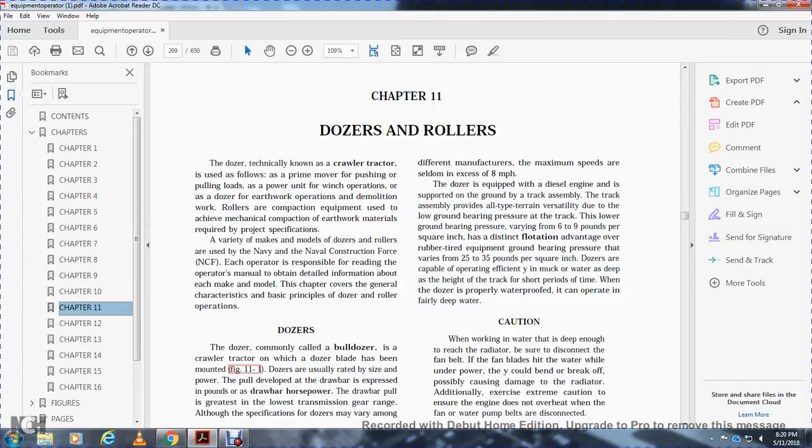We're on Chapter 11: Dozers and Rollers.

Dozers are known as a crawler tractor. It is used as a primary mover, pushing and pulling loads, as a power unit for winch operations, as a dozer for earthwork operations, and for demolition work. Rollers are compaction equipment used to achieve mechanical compaction of earth materials required for project specifications.

A variety of makes of dozers and rollers are used by the Navy and Naval Construction Force. Each operator is responsible for reading the operator's manual to obtain detailed information about each make and model. This chapter covers general characteristics and basic principles of dozer and roller operation.

Dozers are commonly known as bulldozers. It is a crawler tractor on which the dozer blade has been mounted. Dozers are usually rated by size and power.

The pull developed at the drawbar is expressed in pounds, or as drawbar horsepower. The drawbar pull is greatest in the lowest transmission gear range, although specifications for drives on dozers may vary among different manufacturers. Maximum speed is seldom in excess of 8 miles an hour.

Dozers are equipped with a diesel engine supported with a ground track assembly. The track assembly provides all-terrain versatility due to the low ground bearing pressure of the track. Low ground pressure, varying from 6 to 9 pounds per square inch, has a distinct flotation advantage over rubber-tired equipment, where ground bearing pressure varies from 25 to 35 pounds per square inch.

Dozers are capable of operating efficiently in muck or water as deep as the height of the track for short periods of time. When the dozer is properly waterproofed, it can operate in fairly deep water.

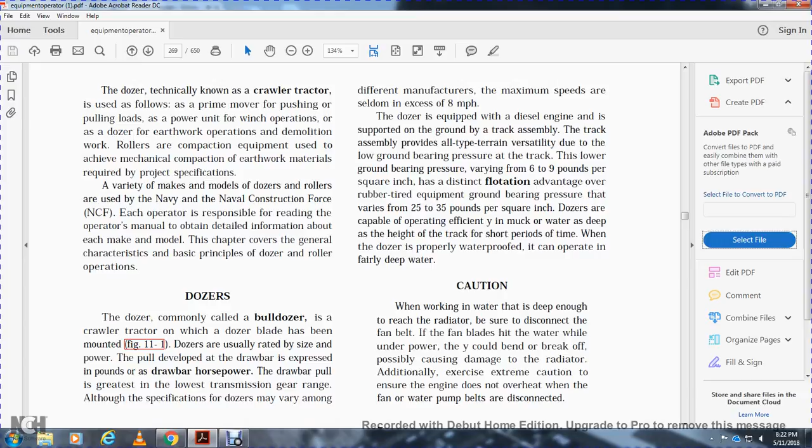Caution: when working in water deep enough to reach the radiator, be sure to disconnect the fan belt. The fan blades hitting the water while under power could bend or break off, possibly causing damage to the radiator. Exercise extreme caution to ensure the engine does not overheat when the fan or water pump belts are disconnected.

Figure 11.1 is the dozer. Figure 11.2 is a side view showing the crawler track chassis, including the drive sprocket, the track assembly, the carrier rollers, the front idler, and the track frame.

Dozers can move from job site to job site under their own power at slow speeds. However, this is poor practice and tends to shorten the operational life of the dozer. For this reason, the dozer should be transported by tractor trailer from job site to job site.

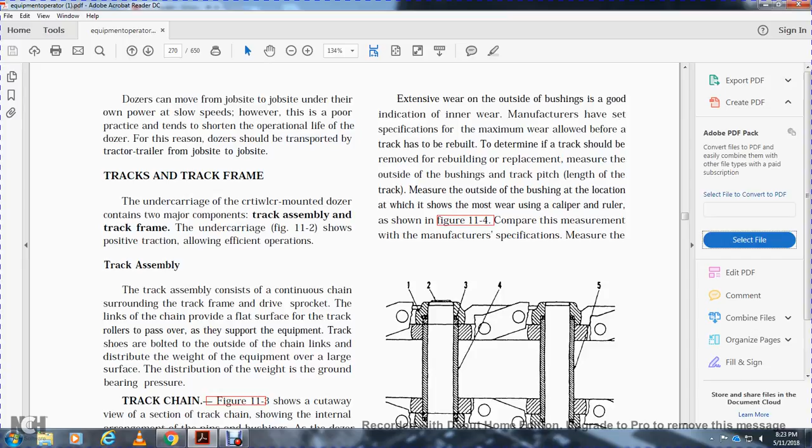Track and track frame: the undercarriage of the crawler-mounted dozer contains two major components, the track assembly and the track frame. The undercarriage provides positive traction along with efficient operation.

Track assembly: the track assembly consists of a continuous chain surrounding the track frame and drive sprocket. The links of the chain, provided with a flat surface, allow the track rollers to pass over as they support the equipment. Track shoes are bolted to the outside of the chain links to distribute the weight of the equipment over a large surface, which is the ground bearing pressure.

The track chain, Figure 11.3, shows a cutaway section of the track chain showing the internal arrangement of the pins and bushings. As the dozer operates, the drive sprocket's teeth contact the track pin bushings, pulling the dozer along. The pins and bushings wear much faster than other parts of the track because of the constant pivoting as the track rotates on the track frame.

This pivoting results in internal wear of both the pins and bushings. As the pins and bushings wear, the track links lengthen, and the track should be adjusted to remove any slack. Extensive wear on the outside of the bushing is a good indication of internal wear.

Manufacturers have set specifications for the maximum wear allowed before the track has to be rebuilt. To determine if the track should be removed for rebuilding or replacement, measure the outside of the bushing and the track pitch length. Measure the outside of the bushing at the location showing the most wear, using a caliper and ruler as shown in Figure 11.4, then compare this measurement with the manufacturer's specification.

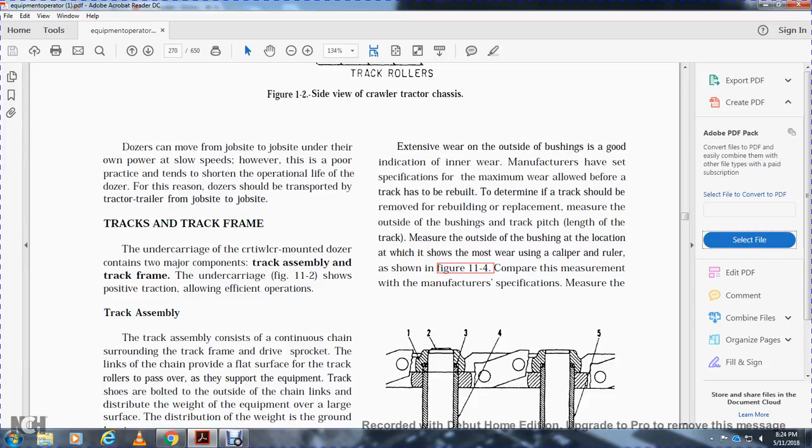Figure 11.3 shows: 1. the spacer, 2. the master pin, 3. the cone disc seal washer, 4. the master bushing, 5. the track bushing, 6. the link, 7. the track pin, and 8. the cone disc seal washer.

Figure 11.4 shows bushing wear measurements.

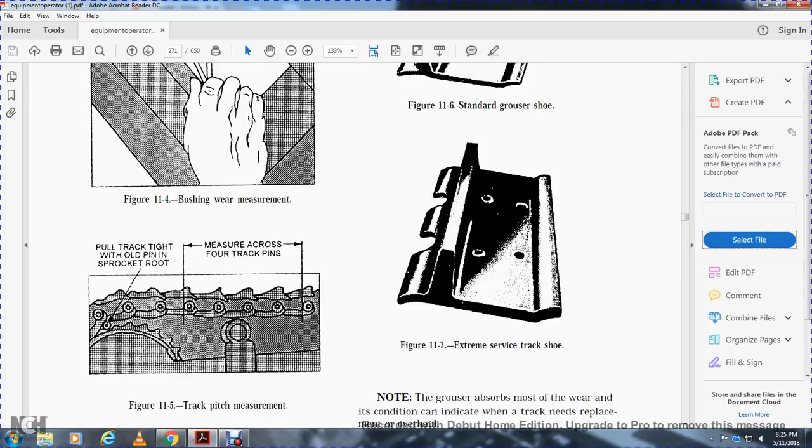Figure 11.5 shows the pull track tight with old pin in sprocket root, and measure across 4 track pins. Track pitch and ruler tape measures are used for tightening the track.

Remove any slack in Figure 11.5.

Track shoes: the most common track shoes are Grouser shoes, shown in Figure 11.6. The shoe is standard on crawler mounted dozers. The extreme service track shoe, shown in Figure 11.7, is equipped on crawler mounted dozers that operate primarily in rocky locations such as rock quarries and coral beaches. Notice the Grouser and raised portion of the shoe is heavier than the standard Grouser shoe. So there's the standard Grouser shoe, and then the Extreme Service Track shoe.

Note the Grouser absorbs most of the wear, and its condition can indicate whether the track needs to be replaced or overhauled. The track frame serves as a framework supporting the track assembly, rollers, front idler, recoil spring, and adjusting mechanism.

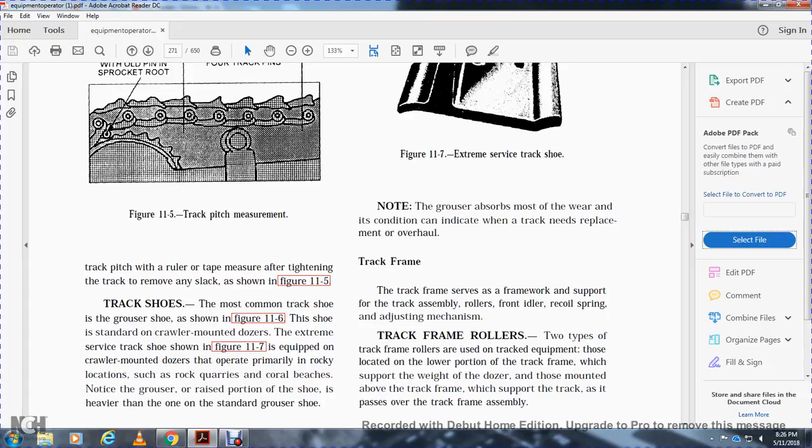Two types of track frame rollers are used with track equipment. Those located on the lower portion of the track frame which supports the weight of the Dozer, mounted above the track frame to support the track as it passes over the track frame assembly.

The single flange of the roller extends up between the links of the track chain, keeping the chain in alignment between the drive sprocket and front idler.

Track rollers support the weight of the Dozer and ensure track chain alignment with the frame as it passes under the rollers. Figure 11.9 shows track rollers, both single and double flange, installed along with the drive sprocket and front idler.

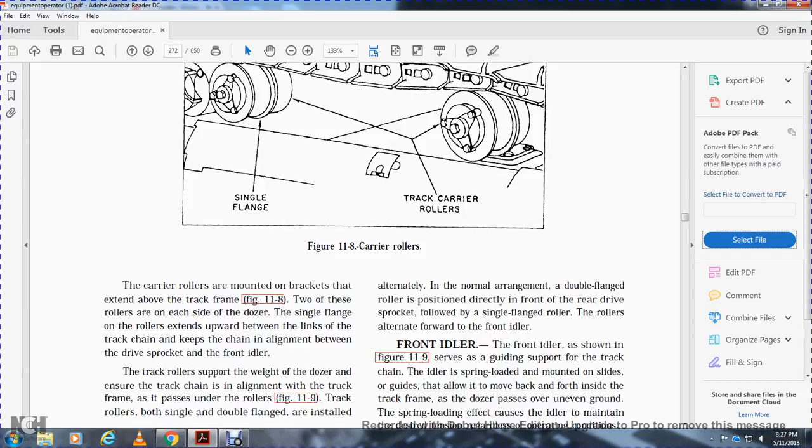Alternately, in a normal arrangement, the double flange roller is positioned directly in front of the rear drive sprocket, followed by the single flange roller, with rollers alternating forward to the front idler.

The front idler is shown in Figure 11.9. It serves as a guiding support for the track chain. The idler is spring loaded and mounted on slide guides, allowing it to move back and forth inside the track frame as the Dozer passes over uneven ground. Spring loading effect causes the idler to maintain desired tension regardless of operating conditions.

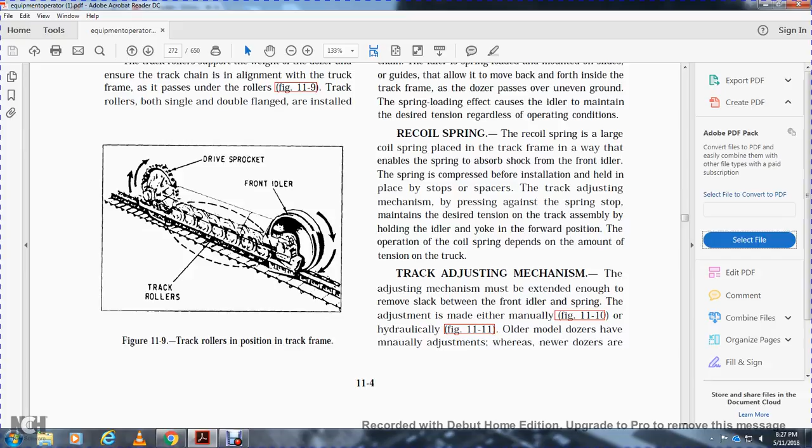Track adjustment mechanism: the adjusting mechanism must be extended enough to remove slack between the front idler and spring. The adjustment is made either manually, as in Figure 11.10, or hydraulically, as in Figure 11.11. Older model Dozers have manual adjustments, whereas newer Dozers are adjusted hydraulically with a grease gun.

The grease gun is pumped and the yoke cylinder extends, providing enough tension to compress the recoil spring and remove the slack from the track. Tension is relieved by loosening the vent screw located with the adjusting fitting. Figure 11.10 shows manual track adjustment, while Figure 11.11 shows hydraulic track adjustment.

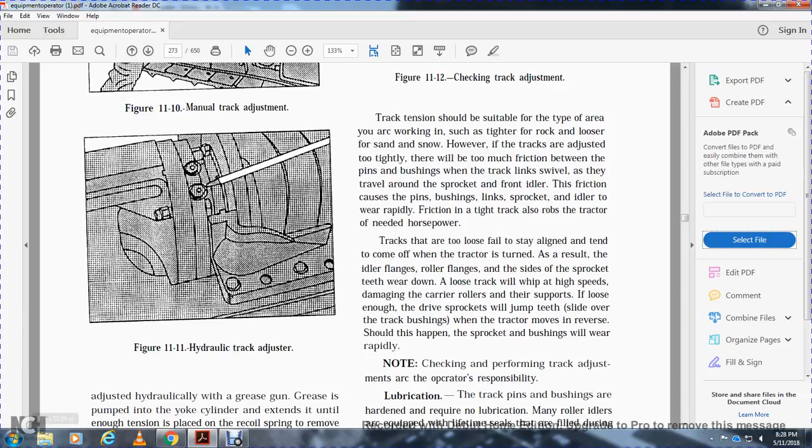Note: do not lubricate the fitting while performing daily operator's maintenance. The track adjuster fitting should only be greased when the tracks require adjustment.

Track adjustment: determine the proper track tension by positioning the Dozer on a hard surface and placing a straight edge over the front carrier roller and idler, with slack removed from the rest of the track. Tension is checked by the measured distance, shown in Figure 11.12, which should be between 1 and 1.5 inches from the straight edge.

The track tension should be suitable for the type of area you're working in, so it should be tighter on rock and looser in sand and snow.

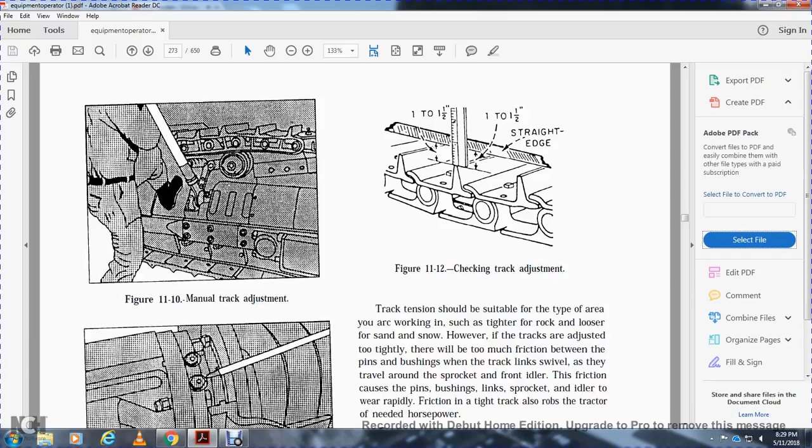However, if the tracks are adjusted too tightly, there will be too much friction between the pins and bushings as the links swivel while traveling around the sprocket and front idler, causing pins, bushings, links, and sprocket idler to wear rapidly. A tight track also robs the tractor of needed horsepower.

On the other hand, tracks that are too loose fail to stay aligned and tend to come off as the tractor is turned. As a result, the idlers and roller flanges on the side of the sprocket teeth will wear down. The loose track will whip at high speeds, damaging carrier rollers and their supports. If loose enough, the drive sprocket will jump teeth and slide over the track bushing when the tractor moves in reverse.

Should this happen, the sprocket and bushings will wear rapidly. Checking and performing track adjustment are the operator's responsibility.

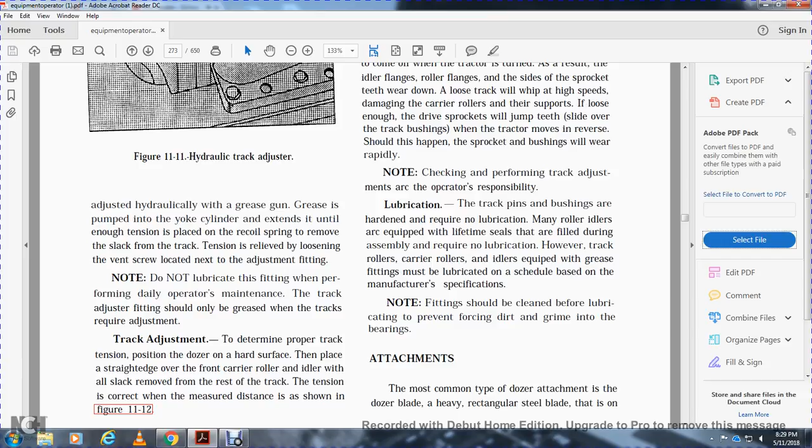Lubrication: track pins and bushings are hardened and require no new lubrication. Many rollers, when equipped with a lifetime seal that are filled during assembly, require no lubrication. However, track rollers and carrier rollers equipped with grease fittings must be lubricated on a schedule based on the manufacturer's specifications. Fittings should be cleaned before lubrication to prevent forcing dirt and grime into the bearings.

Figure 11.14 shows the dozer blade, push arms, and pitch arms. On the front of the crawler tractor, you have drifting, pushing straight ahead, with side casting pushing material to one side. Other attachments include rippers and winches.

Dozer blades' cutting edges and corner bits are bolted to the bottom of the blade. Remember, checking the cutting edge for wear is the operator's responsibility. The blade is connected with two push arms and two pitch arms, as shown in figure 11.14. Most push arms are attached to the bottom of the blade, outside of the track frame, at the trunnion.

Figure 11.15: on dozers equipped with the angle blade, the push arm uses a C-frame configuration. The C-frame is attached to trunnions wrapped around the front of the dozer, and the blade is attached to the C-frame with a steel pin.

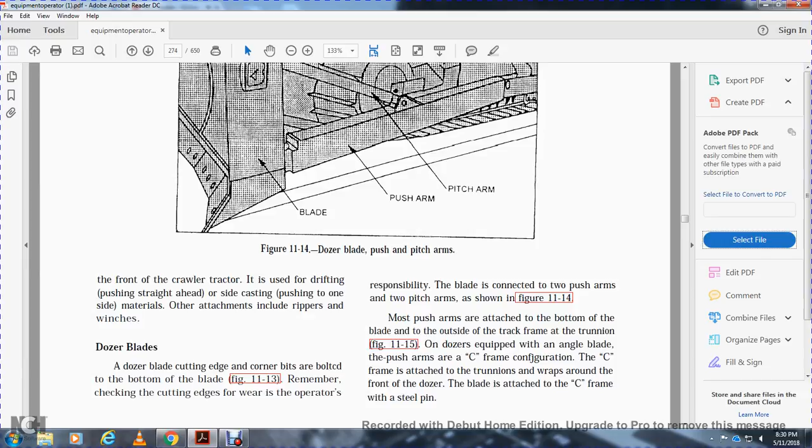Figure 11.15 shows the push arm trunnion. 1 is the cap trunnion. 2 is the bolt cap. 3 is the trunnion. 4 is the C-frame or push arm. 5 is the cap screw trunnion mounting.

Figure 11.16 shows the hydraulic pitch arm. Pitch arms run diagonally between the push arm and the top of the blade, bracing the blade against loads. The pitch arms provide a means of regulating the blade's pitch and tilt.

The pitch arms may be threaded or have hydraulic cylinders, shown in figure 11.16, to pitch the blade forward. Lengthening the arm pitches the blade forward, which helps when dozing extremely hard materials. Pitching the blade back by shortening the pitch arm helps with leveling, spreading, and cleaning loose material without the blade digging in. Tilting is done by shortening one arm and lengthening the other.

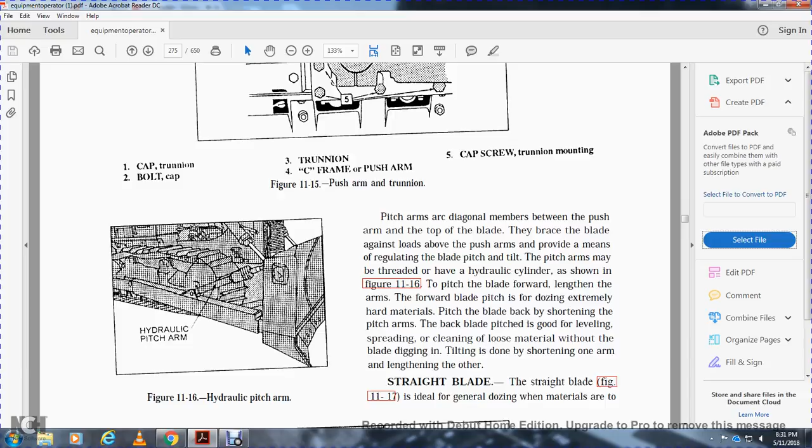The straight blade, figure 11.17, is ideal for general dozing. Figure 11.17 shows a straight blade, figure 11.18 shows an angle blade, and figure 11.19 shows a U-blade. These different blades, depending on their curvature, affect short and medium distance movement of dirt, with varying rolling action, resistance, and speed.

For dozing, the blade has sides advanced ahead of the center section and can tilt up 15 degrees to the right and left.

Your angle blade, figure 11.18, is multi-purpose and can be used for general dozing and side casting materials. The angle blade can be positioned straight ahead or angled 25 degrees to either side. The mold board has a greater curve than the straight blade, producing more rolling action.

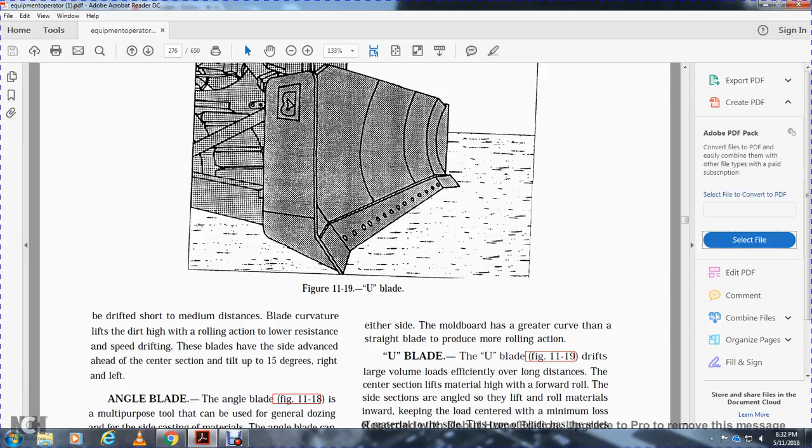Your U-blade, figure 11.19, moves large volume loads efficiently over long distances. The center section lifts material high with a forward roll, while the side sections angle inward to lift and roll materials, keeping material centered with minimum loss to the sides. This blade type has sides well advanced over the center section, is U-shaped, and may be lifted or tilted 15 degrees right or left.

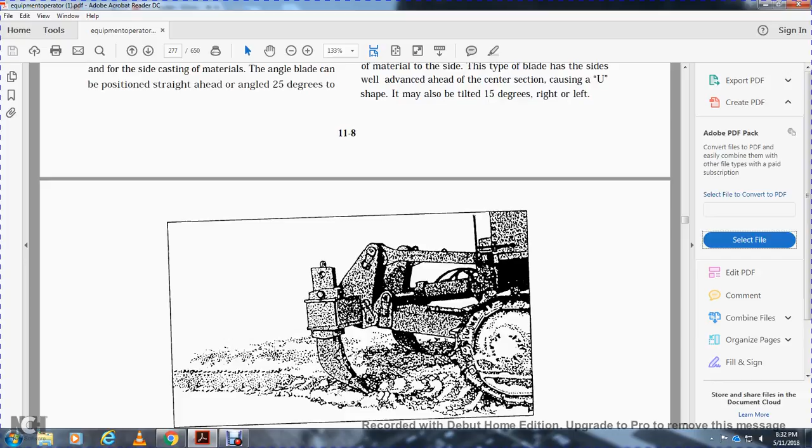Figure 11.20 is a ripper attachment, and figure 11.21 shows a winch attachment. The ripper attachment is mounted at the rear of the dozer. The ripper is a powerful tool used to break apart compacted materials, uproot boulders and stumps, and loosen shale, sandstone, asphalt, pavements, and rip up concrete slabs.

After these materials are uprooted and ripped, they can be removed more easily by supporting equipment. Note: care should be taken when turning the ripper teeth into the ground, because sudden damage to the ripper teeth can occur.

Winches are mounted on the rear of the dozer. Figure 11.21 shows a direct-geared rear power take-off arrangement, which permits development of a line pull 50 to 100% greater than straight dozer pull.

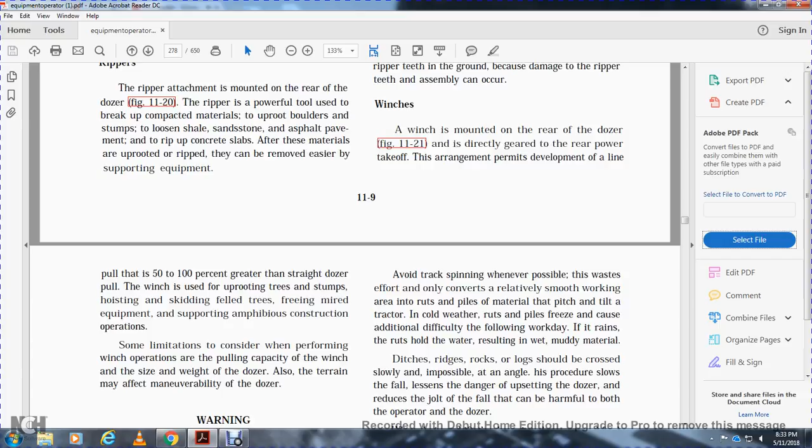The winch is used to uproot trees and stumps, hoisting, skidding felled trees, freeing mired equipment, and supporting amphibious construction operations. Some limitations to consider in winch operations include pulling capacity; the winch should match the size and weight of the dozer.

Also, terrain may affect the maneuver of the dozer.

Warning: the breakage of the wire rope is seriously hazardous to both the operator and the helpers. Wire rope stretches under strain, and if it breaks, it whips with great force. The danger to the operator is greatest when operating a dozer in the area in direct line with the wire rope while it is under strain. Everybody in the area should stand clear of the full length of the paid-out wire rope.

When winding the wire rope back onto the winch drum, ensure the rigger's hands are clear of the winch drum by at least 3 feet.

For safety, ensure the wire rope used is of the best quality, meets the manufacturer's specification, and is properly inspected before use. Always wear leather palm gloves when handling wire rope.

It's good practice to work the winch at less than maximum capacity, avoiding anchoring the dozer unless absolutely necessary. Moderate loads extend the life of the wire rope and winch parts and avoid severe catching on the drum.

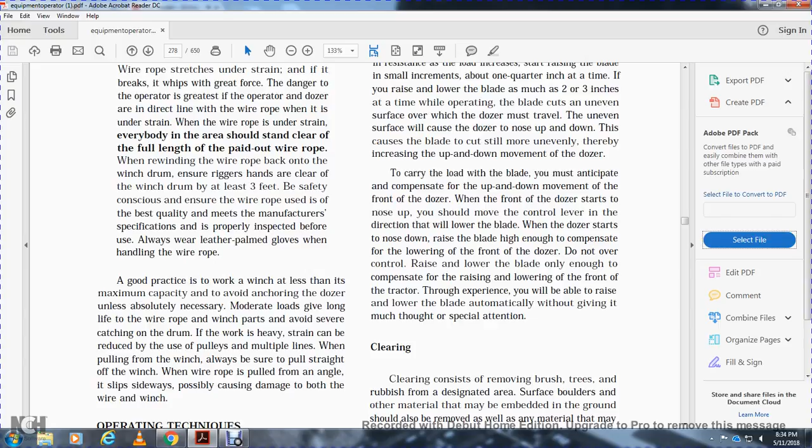Operating techniques: the dozer blade and hydraulic controls are operated by a lever to the operator's front in the cab. Before starting work, lower the blade several times to get a feel of the hydraulic control.

Start a job, if possible, from relatively level ground. If necessary, level an area large enough to provide sufficient workspace for the dozer, preventing back-and-forth pitching of the dozer and resulting in better blade control.

Avoid track spinning whenever possible; it wastes effort and only converts relatively smooth working areas into ruts and piles of material. In cold weather, ruts and piles that freeze cause additional difficulty the following workday. If it rains, ruts hold water, resulting in wet, muddy material.

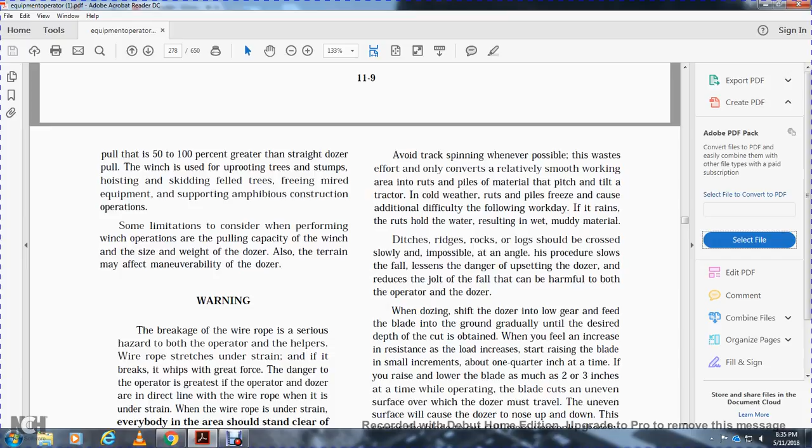Ditches, ridges, rocks, and logs should be crossed slowly and, if possible, at an angle. This procedure lessens the danger of upsetting the dozer and reduces jolts from the fall, which are harmful to both the operator and the dozer.

When dozing, shift the dozer into a lower gear and lower the blade into the ground gradually until the desired depth of cut is obtained.

When you feel increased resistance load, gradually raise the blade in small increments, about 1/4 inch at a time. If you raise or lower the blade as much as 2 to 3 inches at a time while operating, the blade cuts an uneven surface over which the dozer must travel.

The uneven surface will cause the dozer to nose up and down. This will cause the blade to cut still more unevenly, thereby increasing the upward and downward movement of the dozer.

To carry the load with the blade, you must anticipate and compensate for the up-and-down movement of the front of the dozer. When the front of the dozer starts to nose up, move the control lever in the direction to lower the blade. When the dozer starts to nose down, raise the blade.

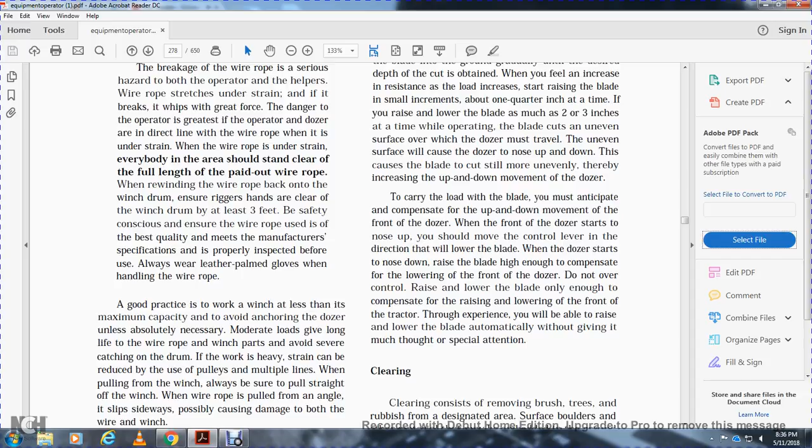Raise the blade high enough to compensate for the lowering of the front of the dozer, but don't over-control it—raise and lower the blade only enough to compensate for the raising and lowering of the front of the tractor. Through experience, you will be able to raise and lower the blade automatically without giving it much special attention.

Clearing consists of removing brush, trees, and rubbish from the designated area. Surface boulders or other material embedded within the ground should also be removed, as well as material that may interfere with the construction project.

Brushes and trees: to clear brush and small trees with the dozer, travel forward at slow speed with the blade lowered several inches below the grade, as shown in figure 11-22.

When clearing with a dozer, make one pass to knock over the small trees and brush, then make another pass to clear them away. For medium trees, about 4 to 10 inches in diameter, raise the blade as high as possible to push trees of this size.

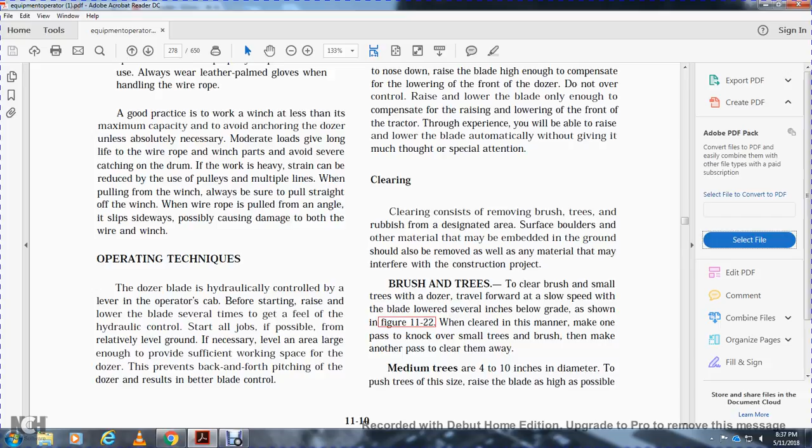Figure 11-22 shows the clearing of brush and small trees. Figure 11-23 shows pushing over a medium-sized tree. To gain leverage, push the tree slowly, as shown in figure 11-23.

Back up quickly to clear the rising root mass, lower the blade, and travel forward to dig the roots free. With the lifting and pushing action, fell the trees so they push readily into the disposal area. Large trees are over 10 inches in diameter, and removal from large trees is slower and more difficult, taking more time.

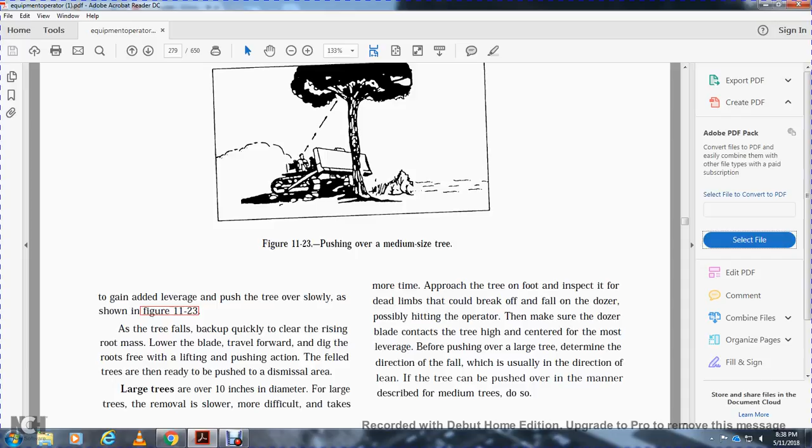Approach the tree on foot and inspect for dead limbs that could break off and fall on the dozer, possibly hitting the operator. Make sure the dozer blade contacts the tree high, centered for the most leverage. Before pushing over a large tree, determine the direction of fall, usually the direction of the lean. If the tree can be pushed over in the manner described for medium trees, do so.

When the tree has a large root system, follow the method using a cut made up the side opposite the direction of the fall. Cut the tree to sever some of the large roots, as shown in figure 11-24A. The roots on both adjacent sides are cut similar to figure 11-24B, and build an earth ramp above the original cut so greater pushing leverage can be obtained to push the tree over, as in figure 11-24C.

Caution: when removing trees, be careful not to injure personnel or damage equipment. The dozer has side coverage for the engine, which helps prevent limbs, sticks, and other debris from entering the engine area. Dozers should never work too close together when clearing trees, because one dozer could push a tree over onto the other.

Do not follow too closely when the tree starts to fall, since the stump may catch under the front of the dozer. The dozer then will need to back off, and in backing off, the bottom of the dozer could be damaged.

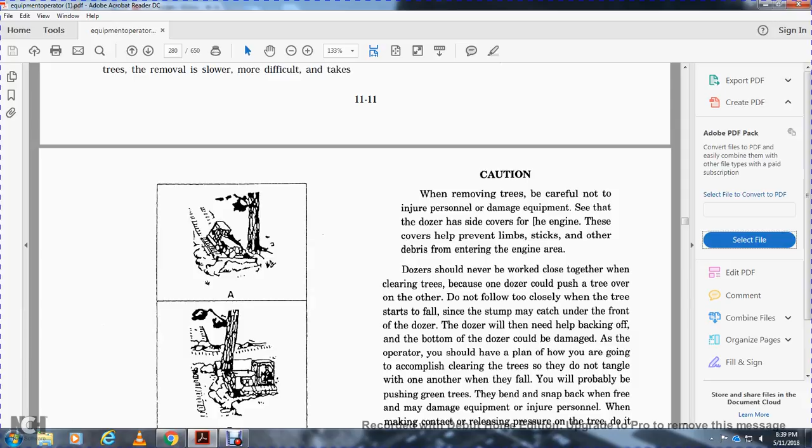As the operator, you should have a plan on how you're going to accomplish clearing the trees so that they do not tangle with one another when they fall.

The problem when pushing a green tree is that bending and snapping back of the frame may damage the equipment or injure personnel when making contact or releasing pressure on the tree. Do it slowly. Tops of trees should not sway and shake, causing dead limbs to break off and fall on the dozer, possibly hitting you.

Know the ground on which you are working; do not high-center the dozer on the stump of the tree. The problem is tougher when working in a wooded area, and you may need help spotting, since another dozer or existing trees could interfere.

When climbing over brush or trees, remember the most common cause of damage to the machine is a stick or limb puncturing the radiator, breaking a hydraulic line, or damaging the exhaust stack. Pay attention and know the capability of your dozer from start to finish.

Stumping: pushing down a whole tree with a dozer is easier than removing the tree first by cutting it down, or removing the stump afterward. The stump is usually too short to gain any push leverage or to provide swaying action for breaking out the roots.

When removing a stump, side-cut deep enough to get the blade under the roots, and when you break up the roots, place the blade well underneath the stump, travel forward, and raise the blade.

If the ground or stump area is not to be disturbed, you may only need to saw the stump off level with the surface grade rather than removing it entirely.

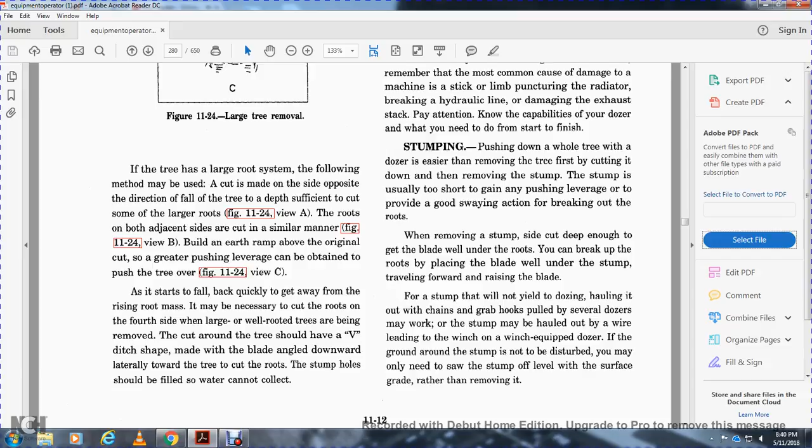Moving rocks and boulders: a dozer with a tilted blade is the most effective piece of equipment for moving rocks and boulders, with the lower corner of the blade hooked well under the boulder.

The best way to exert maximum uprooting pressure is to raise the blade with a right turn of the dozer, with the right lower corner of the blade hooked well under the boulder. Alternatively, the best way to exert maximum uprooting pressure can be to raise the blade with a left turn of the dozer.

A boulder that is deeply embedded should be side-cut like a stump. Some boulders, like stumps, must be broken up; otherwise there's another way to remove them.

If the dozer is not equipped with hydraulic tilt, the blade can be tilted by adjusting the pitch braces of the dozer blade. Lower either corner of the blade to increase digging, and on a straight blade dozer working hard ground, tilt the top of the blade forward.

Working in wet material: wet material is quite difficult to move with a dozer. When the material is too soft to hold up the weight of the dozer, each successive pass should be the full depth of the material. The dozer needs firm footing; mud should be pushed far enough so it doesn't flow back into the cut, providing a rescue path for the dozer if it gets stuck.

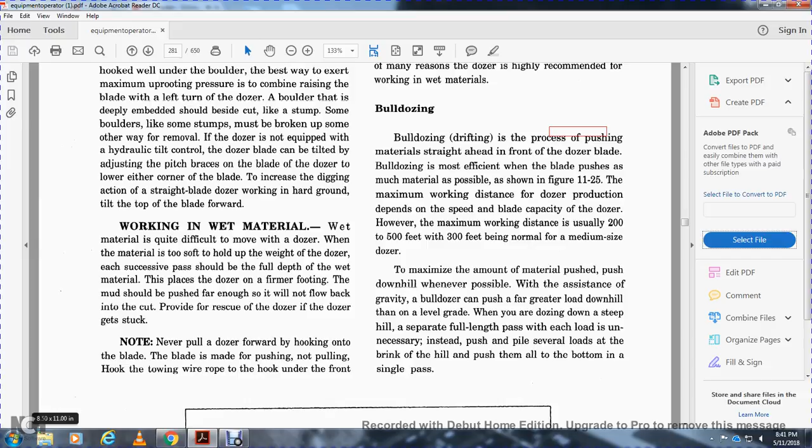Never pull a dozer forward by hooking onto the blade. The blade is made for pushing, not pulling. For towing, hook the wire rope to the front of the tractor, or use the drawbar at the rear of the tractor.

Some dozers are equipped with wider track shoes for better flotation when working in mud or soft materials. These tractors with wide track shoes are called low ground pressure tractors. The extremely low ground bearing pressure is one of many reasons the dozer is highly recommended for working wet materials.

Bulldozing, or drifting, is the process of pushing material straight ahead with the front of the dozer blade. The bulldozer's most efficient push moves as much material as possible, as shown in figure 11-25. Maximum work distance for dozer production depends on the speed and capacity of the dozer.

However, the maximum working distance is usually 200 to 500 feet, with 300 feet being normal for a medium-sized dozer. To maximize the amount of material pushed, push downhill whenever possible, since the assistance of gravity lets the bulldozer push a far greater load downhill than on a level grade. When dozing down a steep hill, avoid separate full-length passes for each load. Instead, push and pile several loads at the break-over of the hill, then push them all to the bottom in a single pass.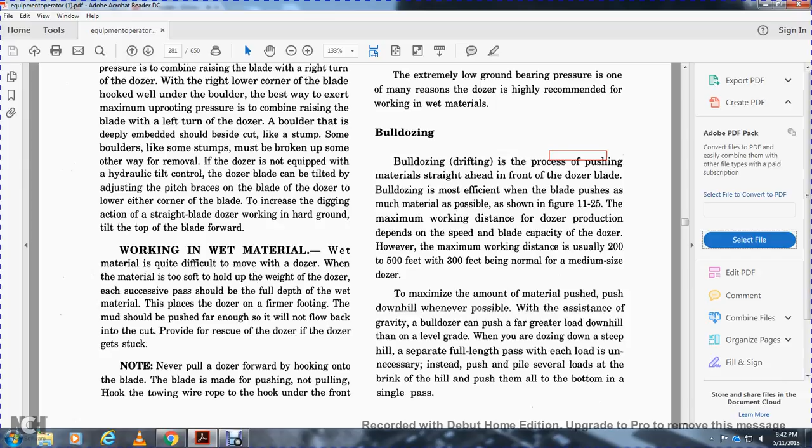Figure 1125 shows bulldozing, figure 1126 shows side-by-side bulldozing, and figure 1127 shows slot dozing.

Side-by-side dozing or slot dozing moves the maximum amount of earth by reducing slippage around the outer edge of the blade. In side-by-side dozing, two dozers work abreast with blade edges as close together as possible to prevent slippage around the blade ends of each dozer.

Side-by-side dozing requires time-consuming maneuvering of the dozers, so in practice it is not used for hauls of less than 50 feet or more than 300 feet.

Slot dozing is done by first building a pair of windrows through several passes, as shown in figure 1127. The windrows serve as barriers to prevent slippage around the dozer blade ends under unfavorable conditions. Slot dozing can increase production by up to 50%.

Figure 1128 shows spreading, and figure 1129 shows culvert backfilling.

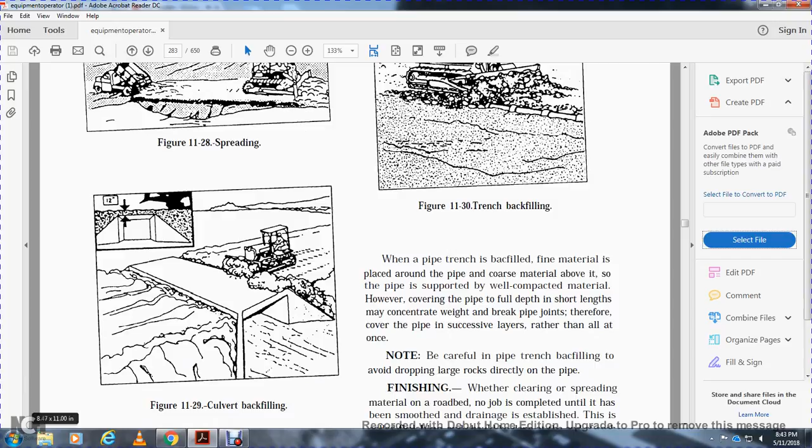Spreading: dozers are ideal for spreading when material is brought in by haul units with the blade in a straight position, so the material drifts directly under the cutting edge.

Backfilling is the process of replacing excavated earth, as shown in figure 1129. When a culvert is being backfilled, the dozer should not cross the culvert unless there is at least 12 inches of compacted material on top of it.

If a bulldozer is used to backfill the culvert, the best method is to make diagonal passes over the material, with each pass swinging the blade in line with the culvert.

An angled blade is preferred for backfilling a trench, because the material can be side-cast into the trench while maintaining steady forward motion, as shown in figure 1130.

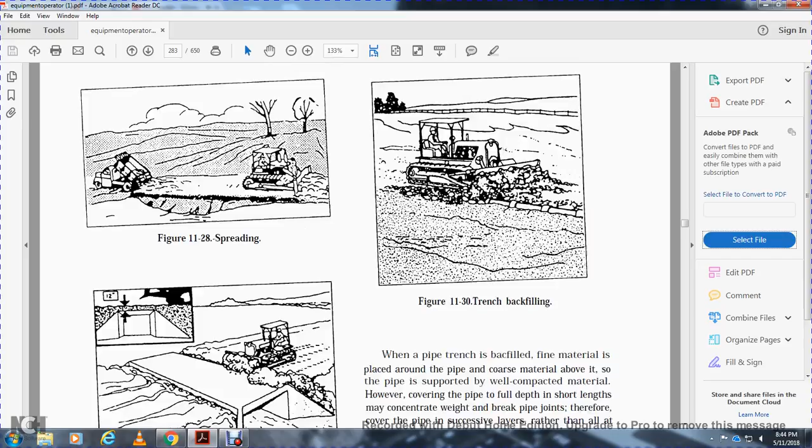Figure 1130 shows trench backfilling. When a pipe trench is backfilled, fine material is placed around the pipe first, with coarse material above it, so the pipe is supported by well-compacted material.

However, if the pipe is covered to full depth in a short length, the weight may concentrate and break the pipe joint. Therefore, cover the pipe in successive layers rather than all at once.

Note: be careful during pipe trench backfilling. Avoid dropping large rocks directly on the pipe.

Finishing: when clearing or spreading material on the roadbed, no job is complete until it has been smoothed and drainage is established. This finishing work should be done at the end of the shift.

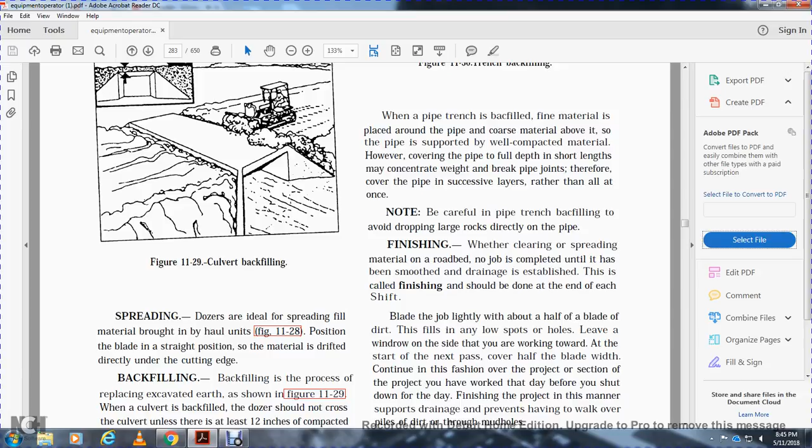Blade the job lightly, with about half the blade over the dirt, covering fills and any low spots or holes. Leave the windrow on the side you're working toward. At the start of the next pass, cover half the blade width again, continuing this fashion over the section of the project worked that day.

Finish the project this way before shutting down for the day, supporting drainage and preventing having to walk over piles of dirt and through mud holes.

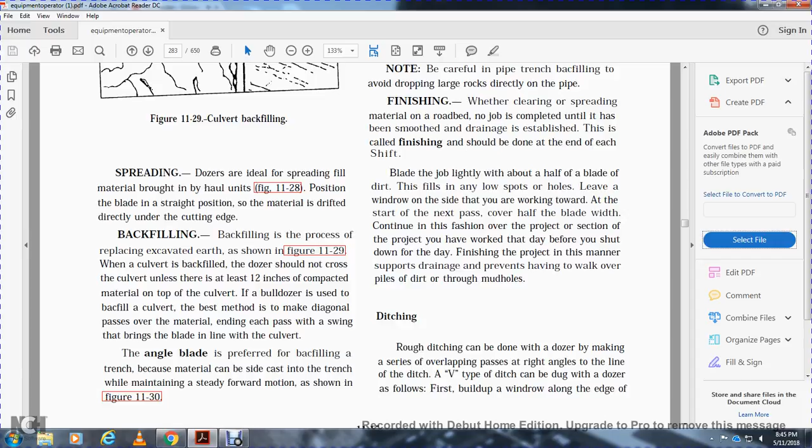Ditching: rough ditching can be done with a dozer by making a series of overlapping passes at right angles to the line of the ditch. A V-type ditch can be dug with a dozer as follows.

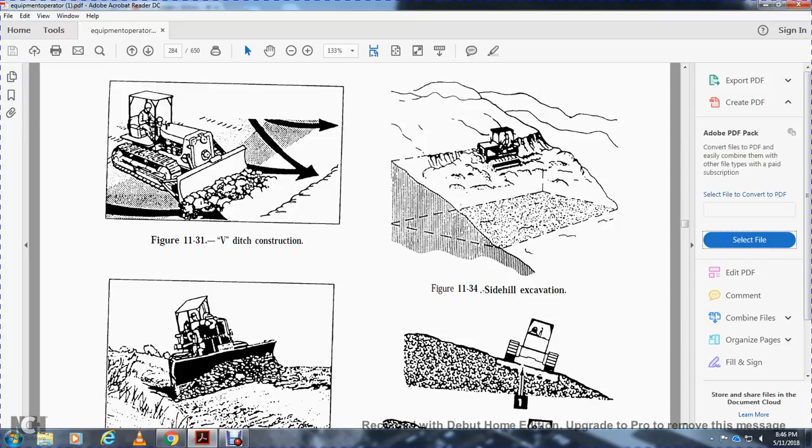First, build a windrow along the edge for V-ditch construction using angle blade ditch cutting. This covers the bench cut, side hill excavation, and shallow slope side hill excavation.

Then turn the machine parallel to the line, the ditch gets cut with the outside track passing along the windrow, with the outside track elevated by the windrow. The blade cuts one side of the V-type ditch, then cuts the other side the same way. The angle blade is preferred for V-type ditching for two reasons: you can side cast the windrow in a single pass, and the angle blade will side cast the material as you travel along the windrow, as shown in figure 1132.

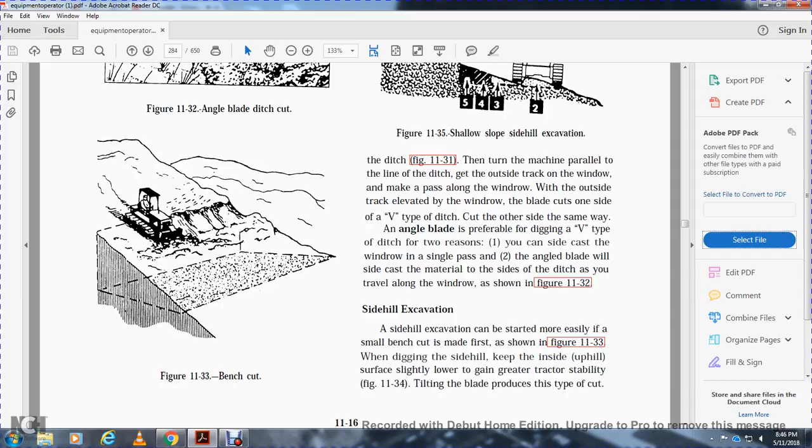Side hill excavation can be started more easily with a small bench cut made first, as shown in figure 1133. When digging the side hill, keep the inside uphill with the surface slightly lower to gain greater tractor stability, as figure 1134 shows tilting the blade to produce this type of cut.

Always cut the shelf wide enough to provide solid equipment support for later use. If possible, move the material downhill to gain the advantage of gravity, reducing effort and increasing the stability of the dozer. On shallow slopes of soft soil, the side hill cut can be managed as shown in figure 1135, cuts 1 and 2.

When backing up, do not raise the blade, as this puts extra weight on the front idlers, causing greater track penetration. Lift the blade as you back away from the edge of soft fills.

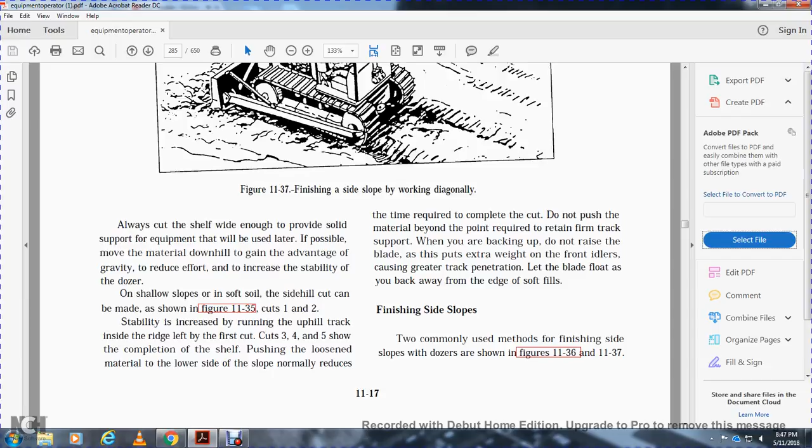Finishing side slopes: two commonly used methods for finishing the side slope with a dozer are shown in figures 1136 and 1137. When side slopes are finished working parallel to the right of way, as in figure 1136, the dozer starts at the top, and the material from each pass falls to the lower side of the blade and ends in the windrow. This is picked up on the next pass, filling irregularities in the terrain.

Do not allow the blade corner to dig, since this steepens the slope beyond the job specification. Finishing side slopes by working diagonally: start the dozer at the bottom and work diagonally up the slope, as in figure 1137. The windrow formed continually drifts to one side, tending to fill spots of irregularity. This diagonal method of finishing the side slope may be used efficiently with a cutting upgrade.

Push dozer: the push dozer in figure 1138 is equipped with a push blade; however, in most cases with the straight blade dozer, a reinforced block in the center of the blade is used. Ensure the center line of the pusher aligns with the scraper. If the alignment is not centered...

You have to keep the push straight without extensive use of the steering clutch. When using the steering clutch, power is taken away from one track and the other track does all the work. If the scraper starts to jackknife, stop pushing, back up, and reposition straight with the scraper.

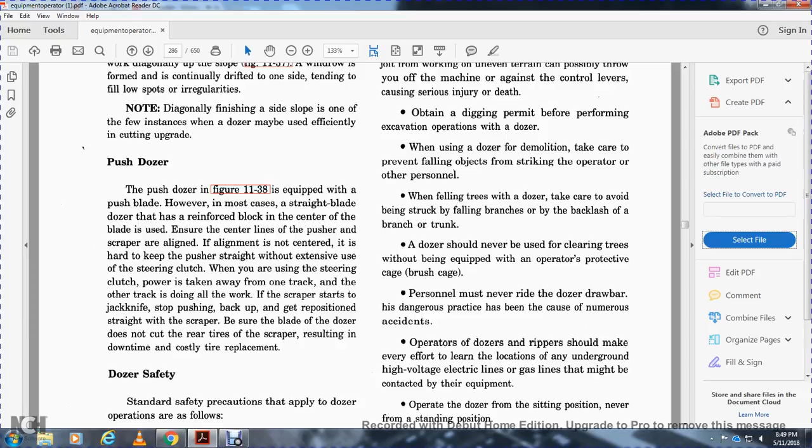Be sure the blade of the dozer does not cut the rear tires of the scraper, resulting in downtime and costly tire replacement. Dozer safety: standard safety precautions that apply to dozer operations are as follows. Only operate the dozer at speeds at which control can be maintained at all times. Figure 1138 shows the push dozer.

Navy safety regulations require all dozers be equipped with rollover protective structures, crankcase guards, and radiator protectors. All dozers purchased for the Navy are equipped with these devices. Dozers must never be used without these devices in place.

Always wear a seatbelt when dozing. A sudden jolt while working on uneven terrain could possibly throw you off the machine against the control levers, causing serious injury or death. Obtain a digging permit before performing excavation operations with a dozer.

When using a dozer for demolition, take care to prevent falling objects from striking the operator or other personnel while falling.

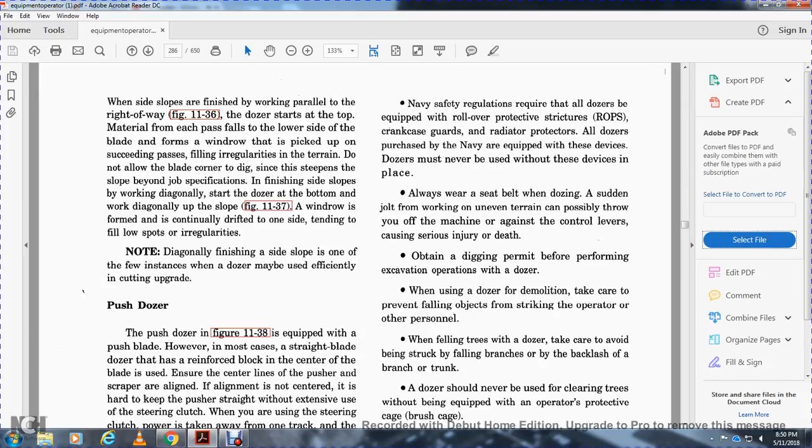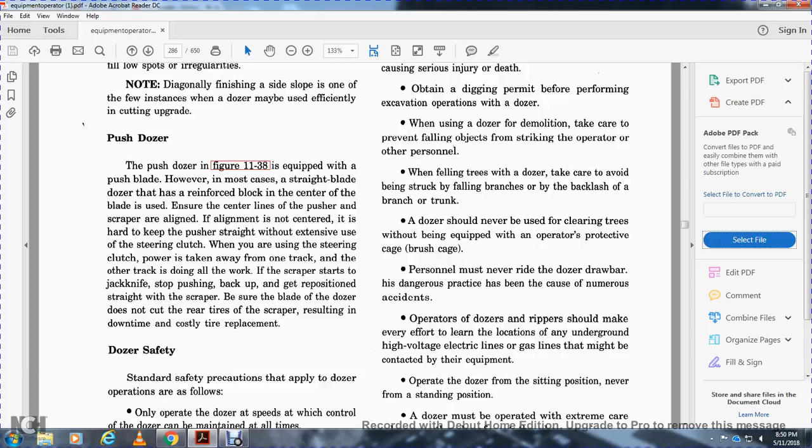When felling a tree with a dozer, take care to avoid being struck by falling branches or the backlash of the branch or trunk. A dozer should never be used for clearing without being equipped with the operator's protective brush cage. Personnel must never ride the dozer drawbar, as this dangerous practice has caused numerous accidents. Operators should make an effective effort to learn the locations of any underground high voltage electrical lines or gas lines that might be contacted by their equipment.

Operate the dozer from a sitting position, never from a standing position. The dozer must be operated with extreme care when near the edge of a cut, where the edge may give way, overturning the machine. A steep incline should be climbed slowly; gunning up a steep slope has often caused dozers to overturn. Do not attempt to turn on a steep slope. Sliding sideways may not appear dangerous, but it can easily become so if the low side of the dozer hits a solid rock or stump.

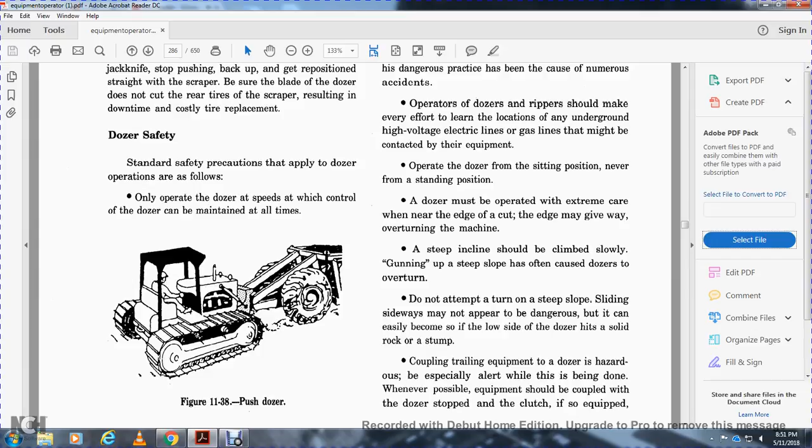Coupling trailing equipment to the dozer is hazardous, especially alertness needed while this is being done. Whenever possible, equipment should be coupled with the dozer stopped and the clutch disengaged, if so equipped. Additionally, set the brake and lower the blade when towing a heavy load downgrade, and keep the dozer in low gear. Coasting is dangerous; a coasting dozer with a towed load is likely to jackknife.

Before dismounting the dozer at the end of the workday, secure the dozer blade by lowering it to the ground. Lowering the blade prevents the dozer from moving, and more importantly, eliminates the possibility of the blade falling on someone. Whenever it's necessary to work on the dozer with the blade up, especially when changing the cutting edge of the blade, it must be securely blocked to prevent it from falling accidentally. When required, wear personal protective equipment such as steel-toe safety shoes and hard hats.

Anytime soil is disturbed, it becomes expanded with a very loose pack. During construction of the fill and subgrade, the loose soil must be compacted into a solid mass. This process of compressing loose soil into a solid mass is called compaction. If soil is not properly compacted during construction, it will settle, causing roads, building foundations, and runways to collapse. Soil may also be compacted naturally by weather and time, and porous soil settlement may be sped up by soaking and allowing it to dry. This process is slow and cannot be depended upon to produce the high density required for project specifications.

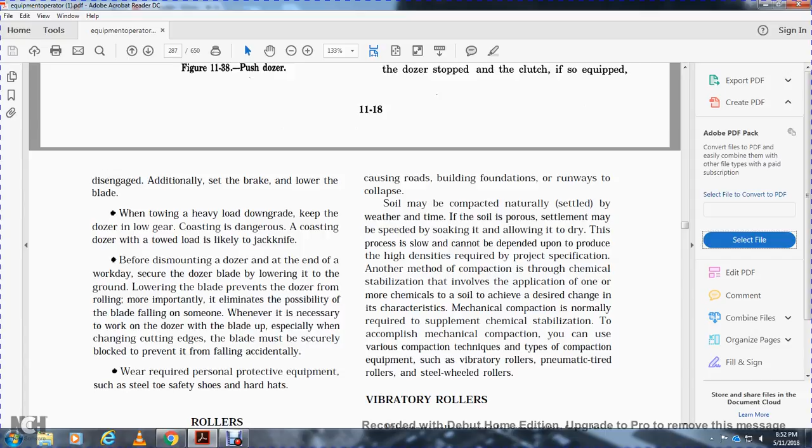Another method of compaction is chemical stabilization, which involves the application of one or more chemicals to the soil to achieve the desired change in its characteristics. Mechanical compaction is normally required to supplement chemical stabilization. To accomplish mechanical compaction, you can use various compaction techniques and types of equipment, such as vibratory rollers, pneumatic tire rollers, and steel-wheeled rollers.

Vibratory rollers provide the compaction force through a combination of weight and vibration. These steel compaction rollers, commonly referred to as drums, are self-propelled and vary in weight from 7 to 17 tons. Propulsion in single drum models is provided by pneumatic tire wheels, as shown in Figure 11-39, which shows the vibratory roller.

Drums on vibratory rollers vary from 3 to 5 feet in diameter and 4 to 8 feet in width. The engine provides power for propulsion and also powers the hydraulic drive for the vibrating unit. Vibration is generated by a rotating eccentric weight inside the drum, and the speed of it determines the frequency. Vibration is imparted to the drum; the weight's distance from the shaft, the eccentric, determines the amplitude, or the amount of impact force. Both the frequency and amplitude of the vibration are controlled independently of roller travel and engine speed.

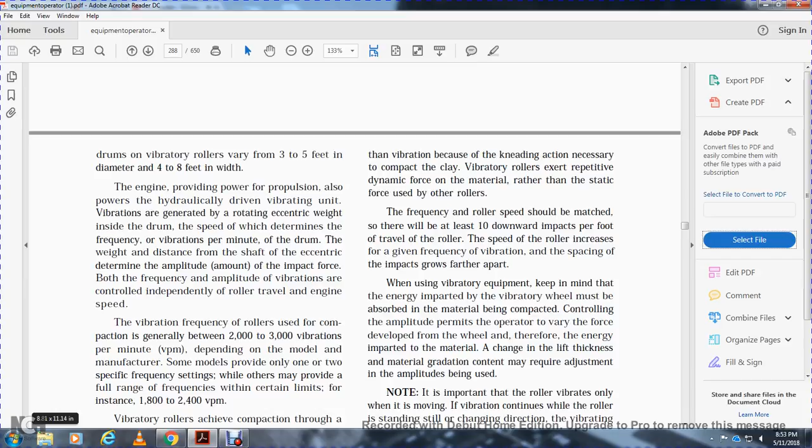The vibration frequency of the roller used for compaction is generally between 2,000 and 3,000 vibrations per minute, depending on the manufacturer's model. Some models provide only one or two specific frequency settings, while others may provide a full range of frequencies within certain limits, for instance, 1,800 to 2,400 vibrations per minute.

Vibratory rollers achieve compaction through a combination of three factors: weight and impact force of the roller, and the vibration response in the soil. Weight is the natural force in compacting soil. Vibratory rollers amplify their static weight through vibration to increase the overall dynamic weight. Impact forces are generated by the vibration of the compaction drum, and they are regulated by the compaction frequency and amplitude of the vibration.

The amount of impact force required to obtain optimum density depends on the type of material being compacted. The impact forces also vary with the diameter of the drum, the width-to-diameter ratio of the roller, static weight, and dynamic impact forces.

Vibration response: vibration in the soil material is the result of the waves of force exerted upon it by the vibratory rollers. With other types of rollers, the material may compact easily or with difficulty depending on moisture content, cohesion, particle shape, and texture.

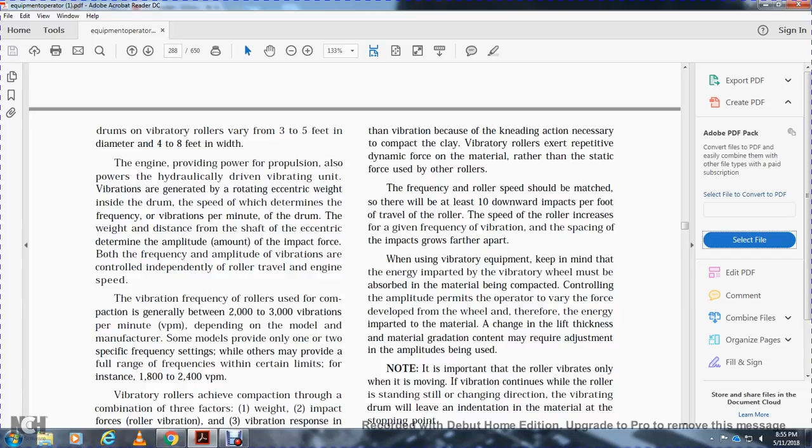Note: it is important that the roller vibrates only while the roller is moving. If the vibration continues while the roller is standing still, or if the direction changes, the vibrating drum will leave an indentation in the material at the stopping point. Modern rollers have automatic cutoffs that stop the vibration when the roller stops moving.

The rollers used for naval construction force are equipped with two interchangeable drums: one known as the sheep's foot drum, shown in figure 1140, and the other known as the smooth drum, shown in figure 1141.

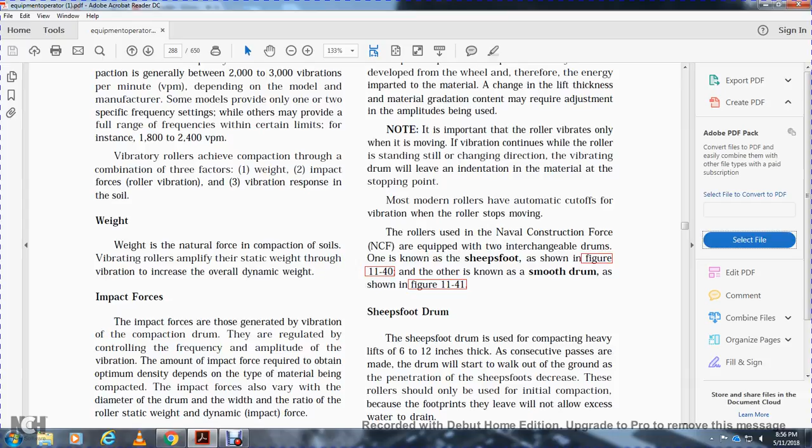The sheep's foot drum is usually used for compacting lifts 6 to 12 inches thick. With consecutive passes, the drum walks out over the ground and the penetration of the sheep's foot feet decreases. This roller should only be used for initial compaction because the footprints left will not allow water to drain.

These rollers concentrate static and dynamic weight on the relatively small contact area of the sheep's foot. The force is exerted through one row of feet in contact with the ground, with all the roller weight concentrated on that row, so they can exert more than 20 pounds of force per square inch.

Smooth drums are used on most heavy fills. Smooth drum rollers work behind the sheep's foot drum and grade with thinner lifts.

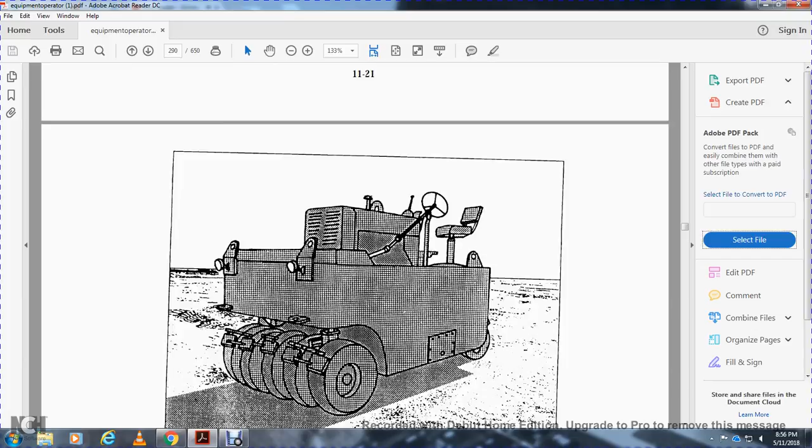Figure 1140 shows the sheep's foot drum. Figure 1141 shows the smooth drum. Figure 1142 shows the pneumatic tire roller.

The smooth drum is often the last piece of compaction equipment required. The smooth drum compacts lifts of 4 to 8 inches and seals the surface, to allow the excess water to drain. Unlike the sheep's foot drum, the smooth drum roller concentrates force over the full width of the drum, so the total dynamic force is slightly less because more of the drum is in contact with the ground.

Pneumatic tire rollers are widely used for compacting subgrades and bituminous mixtures for many types of material, using rubber tires instead of steel drums.

These rollers generally feature two tandem axles, with 3 to 4 tires on the front axle and 4 or 5 tires on the rear, shown in figure 1142, aligned so that the rear tires cover the space left between the tracks of the front tires. The tires are mounted in pairs and can oscillate with a spring action, so they can settle into soft spots that would be bridged by a steel drum.

The rubber tires add a kneading effect to the material, spreading the downward pressure into the space between the tires. Pneumatic tire rollers can be ballasted to adjust weight depending on size and type, ranging from 10 to 35 tons. However, more important than gross weight is the weight per wheel relative to the material being compacted.

Figure 1142 shows the pneumatic tire roller once again, and figure 1143 shows the action of the pneumatic tire roller.

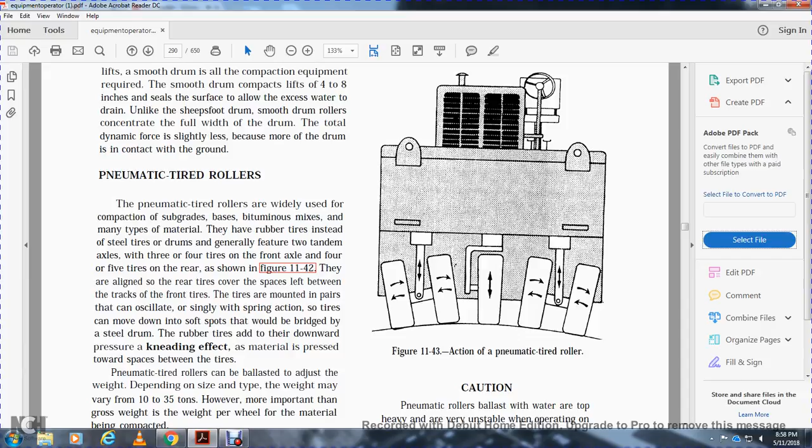It shows the center moving up and down, the right tire banking left and right, and the left tire banking on the other side.

Because pneumatic rollers are ballasted with water, they become top heavy and unstable when operating on uneven terrain.

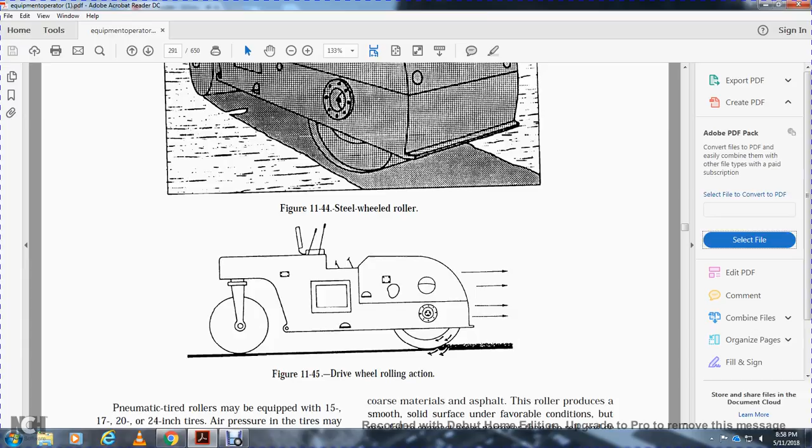Pneumatic tired rollers may be equipped with 15 to 17 to 20 to 24 inch tires. Air pressure for the tires may vary with the type of material, such as 50 to 60 psi for finishing asphalt, with 100 psi to compact a granular sub-base. The tires must be inflated nearly equal, with pressure variation not exceeding 5 psi, to apply uniform pressure during rolling.

Figure 1143 shows the action of the pneumatic tires roller. When pneumatic tires are used, the individual wheel tires can exert a kneading action in a small area, wider rigid steel drums tending to bridge.

It does not compact deeply in proportion to the weight. The steel wheel roller does not change shape, but rather sinks until enough bearing area comes in contact with the roller to support its weight.

The driver wheel is ahead of the tiller wheel in the direction of travel. The tiller wheel functions as a steering axle. As shown in figure 1145, there is a downward vertical force caused by the weight of the wheel, and the arrows, concentric with the steel wheel, represent the rotational force on the wheel.

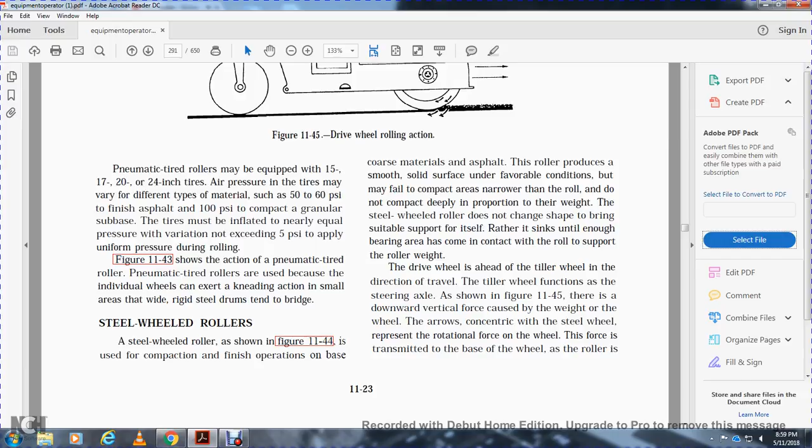The force is transmitted to the base of the wheel as the roller is propelled, with the concentric forces trying to move the weight of the material under the wheel rather than push it away. These forces result in more direct vertical force than those under the tiller wheel.

Now, rolling technique. The rolling technique is basically the same as any type of roller. Some things you must consider are steering, direction, speed, and rolling sequence. Steering sharply causes scuffing damage to the surface, therefore turns should be made slowly and gradually. You may have to back up several times to complete a turn.

Changing direction or speed, starting and stopping, should be done gradually to avoid scuffing the surface. Start stopping ahead of the point where you want to stop and engage the direction control slowly to avoid wheel spinning. Rolling speed should be 1.5 to 3 miles per hour.

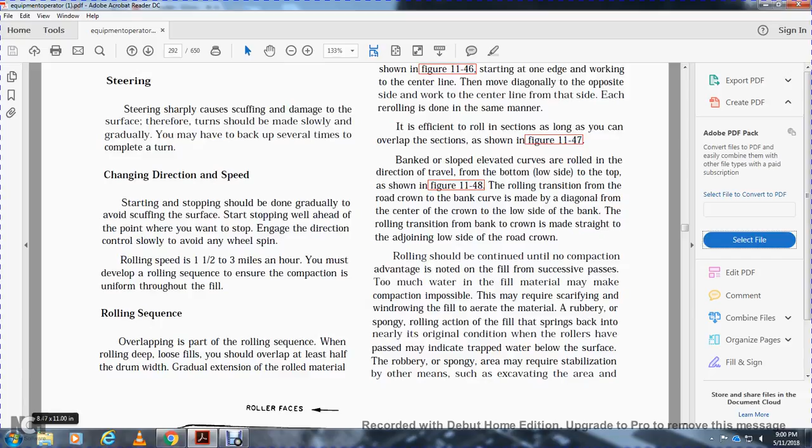You must develop a rolling sequence to ensure compaction is uniform throughout a fill. Overlapping is part of the rolling sequence when rolling deep loose fill, but you must overlap at least half the drum width with gradual extension of the rolled material, since an unrolled area creates greater possibility of local ridges and high spots.

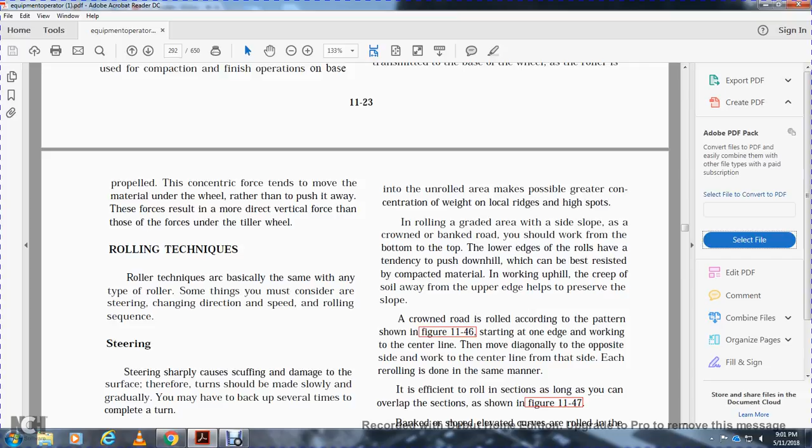The crowned road is rolled according to the pattern shown in figure 11-46, starting at one edge, working to the center line, moving diagonally to the opposite side, then center line from that side, and each re-rolling is done in the same manner.

For efficiency, roll sections as long as you can, overlapping the sections, as shown in figure 11-47. Banked or sloped elevated curves are rolled in the direction traveled from the bottom at low speed up to the top, as shown in figure 11-48.

The rolling transition from the road crown to the bank curve is made diagonally from the center of the crown to the low side of the bank, and the rolling transition from bank to crown is made with a straight path joining the low side of the road crown.

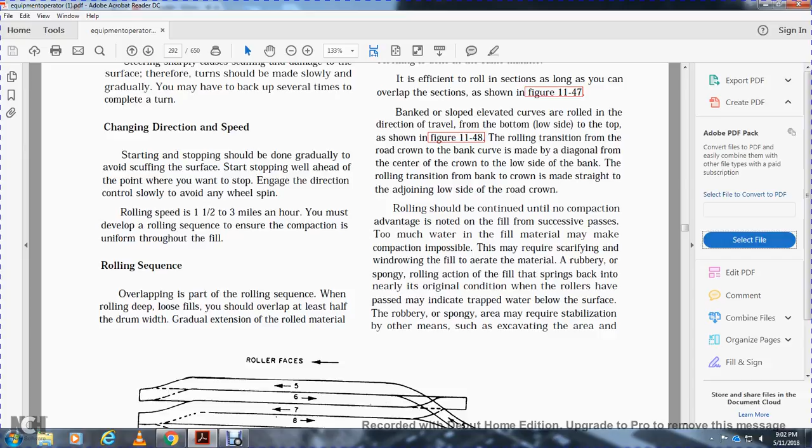Rolling should be continued until no compaction advantage is noted in the fill. With successive passes, too much water in the fill material may make compaction impossible, requiring scarifying and windrowing to aerate the material. Rubbery and spongy rolling action causes the fill to spring back to nearly its original condition after the roller passes, indicating trapped water below the surface. This rubbery, spongy condition may require stabilization or other means such as excavation of the area.

Figure 11-46 shows the crown roller rolling sequence: previously rolled section 1, then 2, then 3, then 4, then 5 on the outside from the center, then 6, 7, and 8 back to 8. The starting section is here, and the next section is 9 over there.

Figure 11-47, overlapping sections. Start of the section 2 with overlap of the section 1 and 2. End of the section 1, start of section 3. Overlap sections 2 and 3. End of section 2.

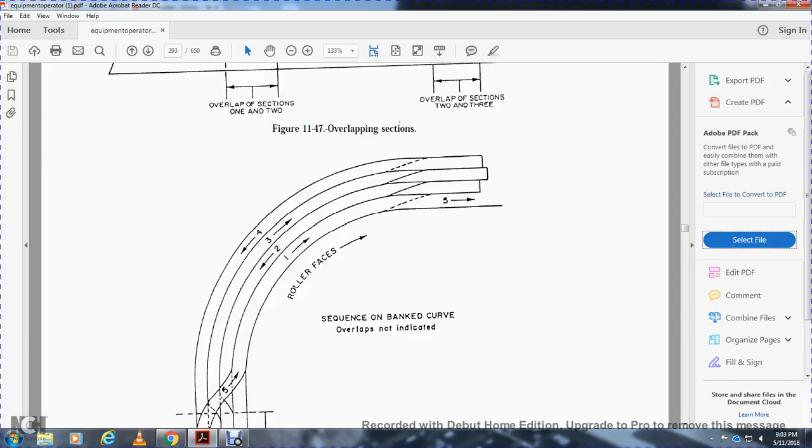Bituminous rolling is the most common compaction method required for bituminous construction, achieved with rollers for the asphalt pavement. Additional compaction and final surface texture are achieved by applying rollers in the proper sequence.

Hot mixtures should be at an optimum temperature for rolling. When the roller starts to operate on the mat being laid, the temperature should range between 225 degrees and 285 degrees.

Rollers designed for bituminous operation are equipped with sprinklers that spray water from the smooth tires and drums. When rolling bituminous material, the roller tires and drums must be kept moist with water to keep the bituminous material from sticking. When water alone is not enough, a non-foaming detergent is added to the water until it has a soapy feeling.

Do not use a detergent designed to break down grease or oil, as this will break down the petroleum products used in the bituminous mixture.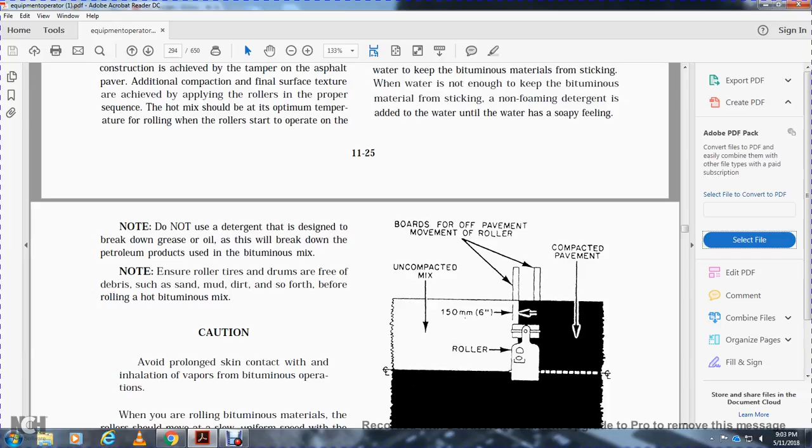Note: ensure the roller tires and drums are free of debris, sand, dirt, and so forth before rolling hot bituminous mix. Caution: avoid prolonged skin contact and inhalation of vapors from bituminous operations.

When rolling bituminous materials, rollers should move at a slow, uniform speed with the drive wheels positioned toward the pavement. The speed should not exceed 3 miles per hour. Pneumatic-tired rollers should not exceed 5 miles per hour.

Asphalt rollers must be kept in good condition and should be capable of being reversed without backlash. Rolling direction should not be suddenly changed or reversed, as this would displace the mix. A pronounced change in direction should only be made on stable material.

Rolling hot bituminous material is done in the following sequence: transverse joints, longitudinal joints when adjoining previously placed lanes, break-down initial rolling, intermediate second rolling, and finishing rolling.

As a guide, longitudinal joint and edge rolling should be performed directly behind the paver. Break-down rolling less than 200 feet behind the paver, intermediate rolling 200 feet or more behind the break-down rolling, and finishing rolling as soon as possible behind the break-down rolling.

Transverse joints: when a transverse joint is placed next to an adjoining lane of the first path, it may be rolled with the steel wheel roller moving along the longitudinal joint for a short distance, checking with a straight edge and making corrections if necessary. The joint is rolled transversely except for the 6-inch wheel width of the previously laid material, as shown in Figure 11-49.

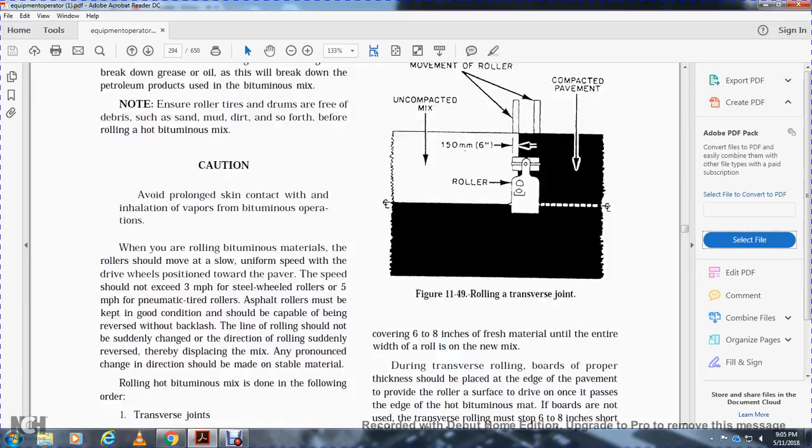Covering 6 to 8 inches of fresh material across the entire width of the new mix roll. During transverse rolling, boards of proper thickness may be placed at the edge of the pavement to provide the roller with a driving surface as it passes over the edge of the bituminous mat.

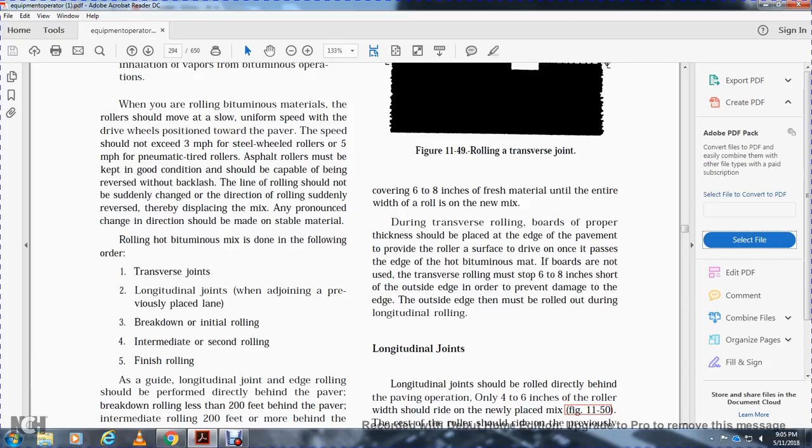If boards are not used, transverse rolling must be stopped 6 to 8 inches short of the edge, in order to prevent damage to the outside edge that may occur from rolling out during the longitudinal rolling.

Longitudinal joints should be rolled directly behind the paving operation, with only 4 to 6 inches of the roller's width riding on the newly placed mix.

As shown in Figure 11-50, the rest of the roller should ride on the previously compacted side of the joint. With each subsequent pass, more of the roller is placed on the mix until the entire width of the roller is on the newly placed mat.

When rolling a longitudinal joint with a vibratory roller, the roller drum extends 4 to 6 inches over the previously compacted lane, with the rest of the drum riding on the newly placed mat. The roller continues rolling along the line until the properly compacted longitudinal joint is obtained.

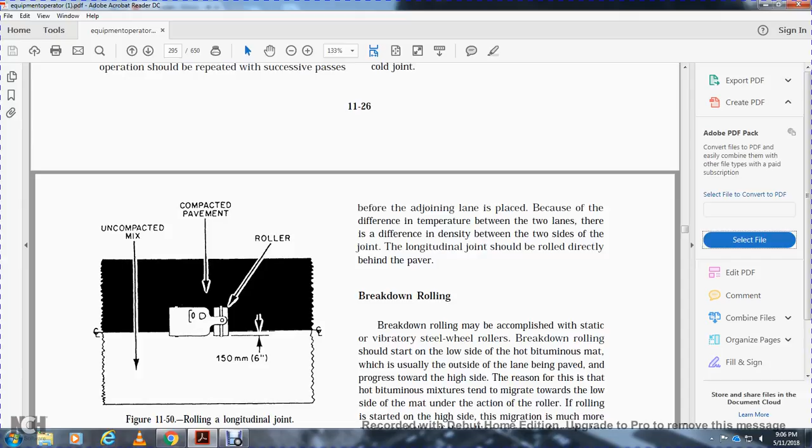Longitudinal joints can be categorized as hot or cold joints. Figure 11-50 shows rolling a longitudinal joint, with the roller on the compacted pavement at 6 inches and on the uncompacted mix.

Hot joints between two lanes of mix placed at approximately the same time. A paver working in an echelon type of laydown produces the best longitudinal joint because both lanes are at near the same temperature. When the material compacts under the roller, it forms a single mass, resulting in little or no difference in density between the two lanes.

When paving in echelon, the breakdown roller follows the lead paver, which leaves a 3 to 6 inch unrolled edge. The second paver follows this edge. The roller should stay as close as possible to the first paver to ensure uniform density, while the roller following the second paver compacts the hot joint on the first pass, as shown in Figure 11-51.

A cold joint is a joint between two lanes where one has cooled overnight and no longer bonds well. Figure 11-51 shows the rolling of a hot longitudinal joint, where the overlap between the first lane and the second lane is approximately 3 inches.

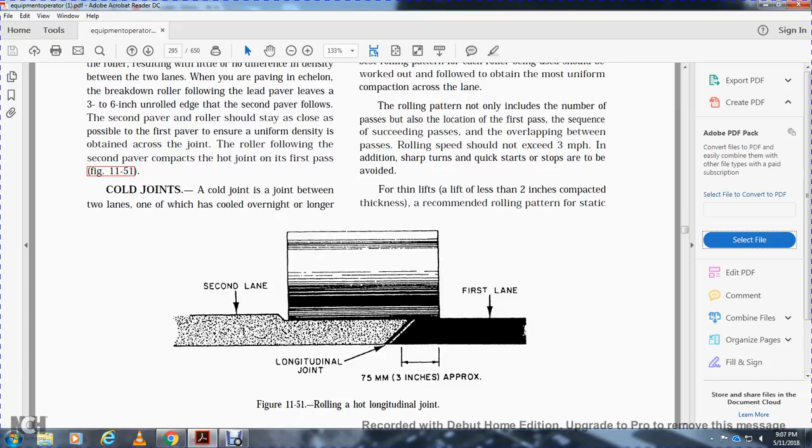Before the adjoining lane is placed, because of the difference in temperature between the two lanes and the difference in density between the two sides of the joint, the longitudinal joint should be rolled directly behind the paver during breakdown rolling. Breakdown rolling may be accomplished with static or vibratory steel wheel rollers.

Breakdown rolling should be started on the low side of the hot bituminous mat, usually outside of the lane being paved, and proceed toward the high side, because the hot bituminous mixture tends to migrate toward the low side of the mat under the action of the roller. If rolling is started on the high side instead, this migration becomes much more pronounced than if rolling progresses from the low side.

When joining adjacent lanes, the same rolling procedure should be followed only after the compaction of the longitudinal joint. A rolling pattern that provides the most uniform coverage of the lane being paved should be used. Rollers vary in width.

A single recommended rolling pattern for all rollers is impractical. For this reason, the best rolling pattern for each roller being used should be worked out and followed to obtain the most uniform compaction across the lane. The rolling pattern indicates not only the number of passes, but also the sequence of the first pass and succeeding passes.

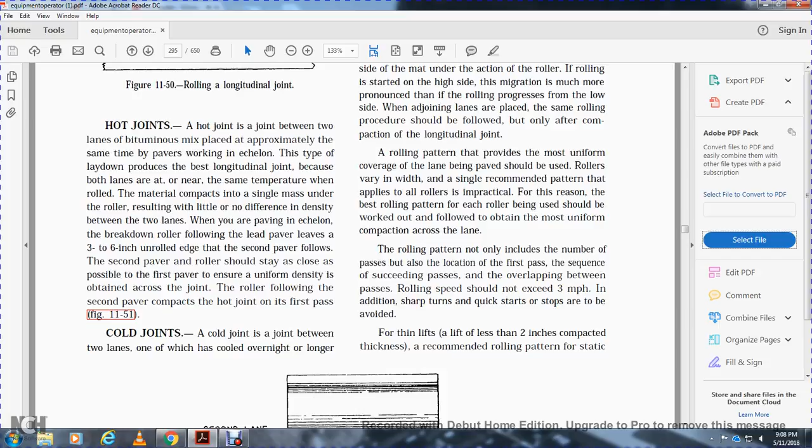Overlapping between passes is important, and rolling speed should not exceed 3 miles per hour. In addition, sharp turns and quick starts and stops are to be avoided. For thin lifts, less than 2 inches of compacted thickness, there is a recommended rolling pattern for static rollers.

Figure 11-52 shows the correct rolling pattern. With the recommended rolling pattern, every pass of the roller should proceed straight into the compacted mix or return in the same path. After the required passes are completed, the roller should be moved to the outside of the pavement onto cooler material, and the procedure repeated.

This shows the width of the rollers: pass 1 and 3 are about 3 feet apart, pass 1 goes forward, pass 2 goes back, then pass 3 is the next pass, pass 4 goes back, then over to pass 5, then back to 6, and then 7.

Steel-tired rollers are shown in Figure 11-52. Rolling operations should start with the edge of the hot mat on the low side of the roller, moving forward as close behind the paver as possible.

The second move of the roller should be reversed along the same path until the roller has reached previously compacted material. At that point, the roller aligns for pass number 3, again staying close behind the paver. The fourth movement is a reversal, repeating the third path, and the entire width of the hot mat may be rolled in this fashion.

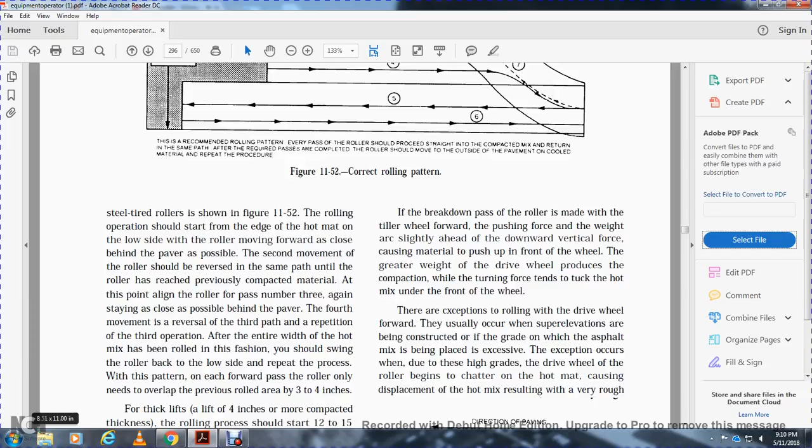The roller should then swing back to the lower side and repeat the process with the same pattern. Each forward pass of the roller only needs to overlap the previously rolled area by 3 to 4 inches.

For thick lifts, 4 inches or more of compacted thickness, the rolling process should progress 12 to 15 inches from the lower unsupported edge over the center portion of the hot mix. The uncompacted edges provide initial confinement during the first pass, allowing minimum lateral movement of the hot mix.

Once the central portion of the hot mix has been rolled and compacted, the compacted portion will support the roller, allowing the edge to compact the lateral material. When using steel-wheeled rollers, the operation should always progress with the driving wheel forward in the direction of travel.

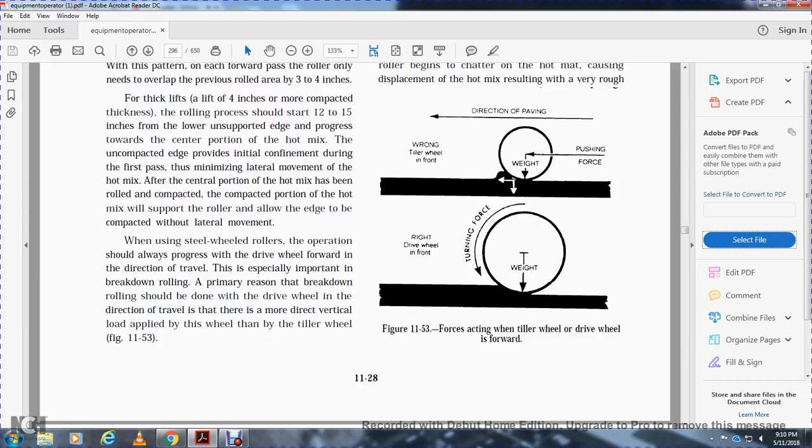It's especially important in breakdown rolling that the driver wheel goes forward in the direction of travel, because there's more vertical load applied by the driver wheel than the tiller wheel, as shown in figure 11-53.

If the breakdown pass is made with the tiller wheel forward, the pushing force stays slightly ahead of the downward vertical force, causing material to push up into the front of the wheel. The greater weight of the driver wheel produces compaction, while the turning force tends to tuck the hot mix under the front of the wheel.

Exceptions to rolling with the driver wheel forward usually occur when super elevations are being constructed, or if the grade over which the asphalt is being placed is excessive. On these high grades, the driver wheel of the roller may chatter on the hot mat, causing displacement of the hot mix and resulting in a rough surface.

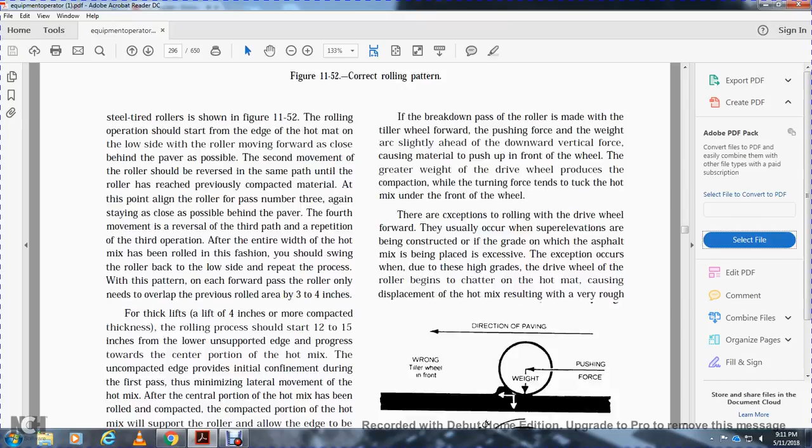Figure 11-53 shows the forcing action of the tiller wheel and the driver wheel. It shows the direction of paving, the wrong way with the tiller wheel in front and the pushing force of the weight, and the right way with the turning force and weight properly positioned.

On such surfaces, the roller must be turned around to allow the tiller wheel to compact the material partially so that the driver wheel can proceed over it.

Intermediate rolling should closely follow the breakdown rolling while the asphalt mix is still above the minimum temperature of 185 degrees, so that densification can be achieved. Pneumatic tire or vibratory rollers may be used in intermediate rolling.

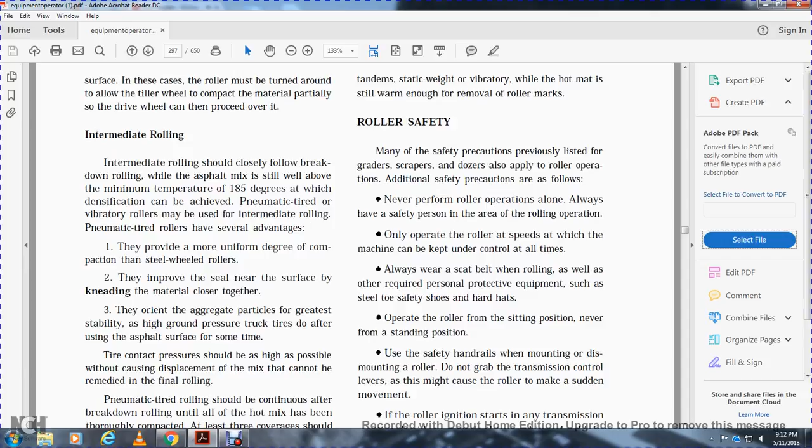The tire contact pressure should be as high as possible without causing displacement that cannot be remedied in the final rolling. Pneumatic tire rolling should be continuous after breakdown rolling until all the mix has been thoroughly compacted, with at least 3 coverages made.

Turning pneumatic tires on the hot mix should not be permitted unless it does not cause undue displacement. For vibratory rollers, the proper static weight with vibration frequency and amplitude should be set to provide the required density with fewer coverages than a static weight tandem, pneumatic tire rollers, or a combination of the two.

Regardless of the type of roller used, the rolling pattern should be developed in the same manner as for breakdown rolling, and the pattern should be continued until the desired compaction is obtained.

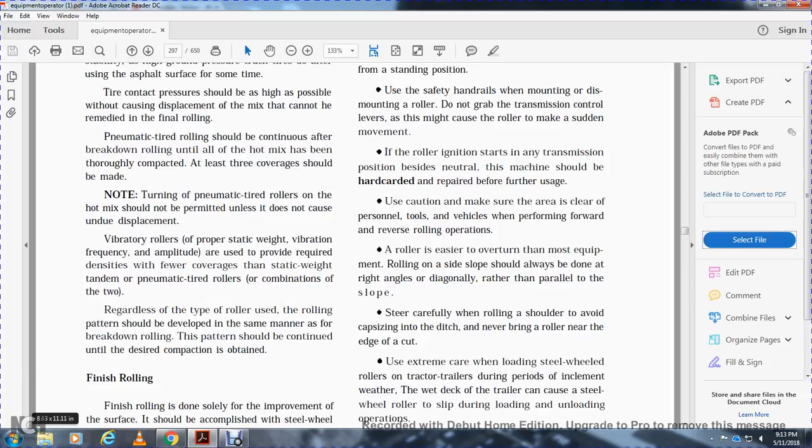Finishing rolling is done solely for improvement of the surface. It should be accomplished with a steel wheel tandem, statically weighted or with vibration, while the hot mat is still warm enough to remove the roller marks.

Roller safety: many of the safety precautions previously listed for graders, scrapers, and dozers also apply to roller operations. Additional safety precautions are as follows. Never perform roller operations alone, and always have a safety person in the area of the rolling operation.

Only operate the roller at speeds at which the machine can be kept under control at all times. Always wear a seatbelt while rolling, as well as other required personal protective equipment such as steel-toe safety shoes and hard hats. Operate the roller from the sitting position, never from a standing position.

Use the safety handrails when mounting and dismounting the roller. Do not grab the transmission control lever as this might cause the roller to make a sudden movement.

If the roller's ignition starts with any transmission other than neutral, the machine should be hardcarded and repaired before further use.

Use caution and make sure the area is clear of personnel, tools, and vehicles when performing forward and reversing rolling operations. A roller is easier to overturn than most equipment.

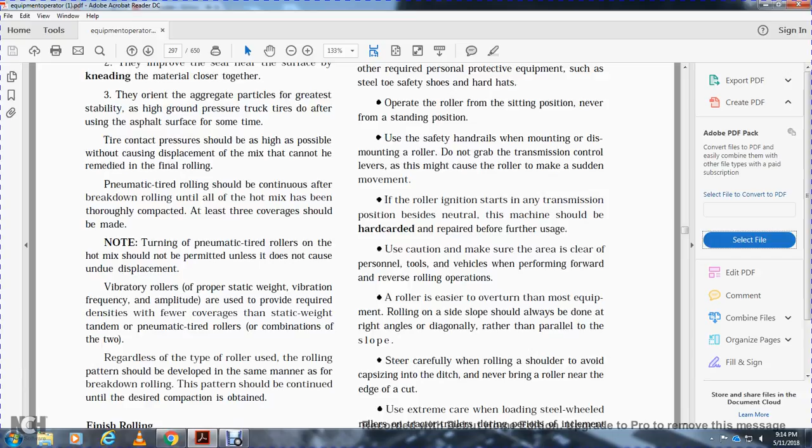Rolling on a side slope should always be done at right angles or diagonally rather than parallel to the slope. Steer carefully when rolling a shoulder to avoid capsizing into a ditch. Never bring the roller near the edge of a cut.

Use extreme care when loading steel wheel rollers onto tractor-trailers during periods of inclement weather. A wet trailer deck can cause the steel wheel roller to slip during loading and unloading operations.

Chapter 12, Cranes and Attachments.